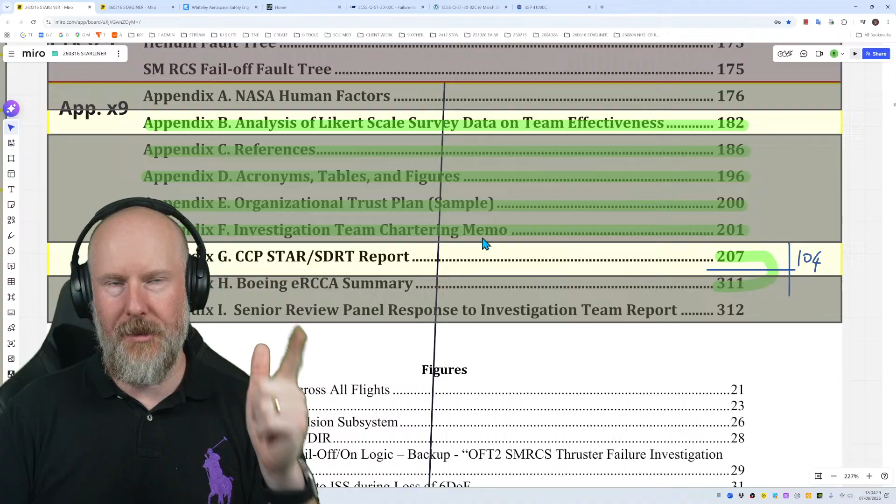So we got up to last time, we started working through yesterday. This week we've done two live streams, Livestream 27 and Livestream 28. We started to go through the commercial crew program STAR and SDRT report. This is like two investigation teams' work that's been put together in a report, which has formed an annex to this bigger PIT team investigation report. This is quite a large section, over 100 pages. We started digging into it in detail yesterday on Livestream 28, and hopefully in Livestream 29 today we will get through it, and then that'll be the end of the report. But as I say, it's quite a big section, so if I need to schedule some more live streams, then I'll just have to do that. There's the progress through that section of the report. We've got through the first part, and we've got to get through all of this. So we're going to make some good progress. We're going to pick up today with general findings.

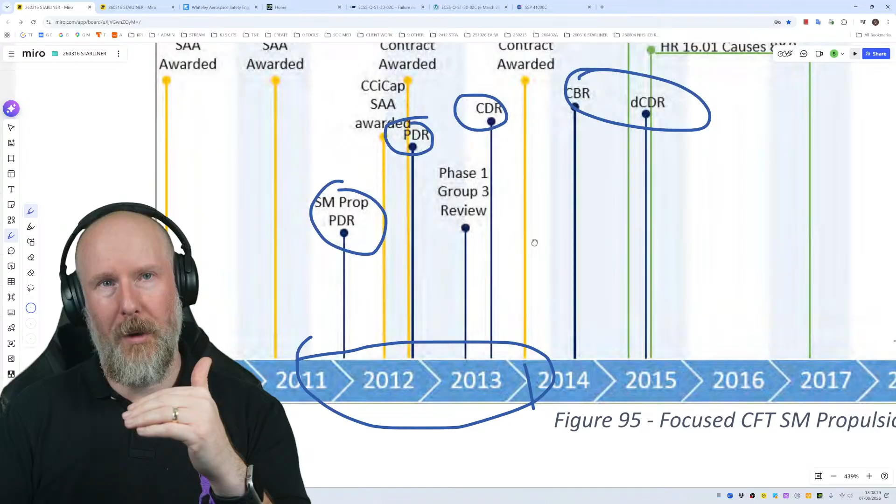So you could argue that if there are issues with the safety assessment and the design, the architecture of the propulsion system, it was kind of baked in that time period, 2011, 2012, 13. So it's a full 10 years before the thing went flying for the first time. Or was it the first time? Was it? Oh, there we go, 2021, 2019. So before they put people on it, it was 10 years.

But before they went flying the OFT 1 and 2, 2019 and 2021, they had issues with propulsion during that period. So yeah, there was opportunity to recognize the issues. So why was that opportunity lost or squandered? What was going on?

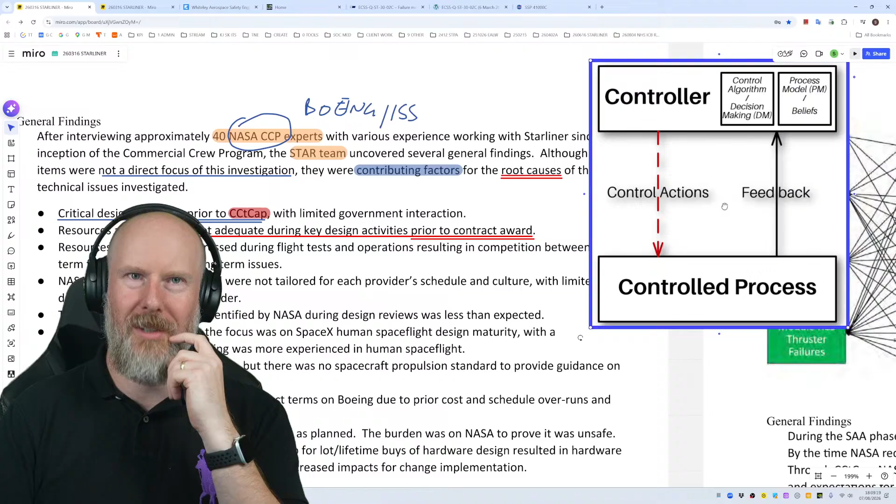Resources and skills were not adequate during key design activities prior to contract award. Okay, so thinking about the control loop, let's get our little jigsaw piece together. Where is it? There we go. Let's have our jigsaw piece down here. This is the core concept. So who or what is the controller in charge of resources and skills? Who's in charge of that? What organization is in charge of that? Why does it make sense that they didn't have adequate resources and skills? That was talked a bit about yesterday on yesterday's live stream. But again, this is what the investigation should be going and digging into.

Resources and skills were stressed during flight test and operations, resulting in competition between near-term flights and resolving long-term issues. So that balance between, the closest crocodile to the canoe. I'm sure you've heard that terminology, and it frustrates the hell out of me, because if you're on a canoe and there's some crocodiles coming and you're going to go over a waterfall, what do you deal with first? Do you deal with the crocodiles, or do you try and paddle away from the waterfall? Which is it? I'm not saying there's a correct answer. I'm just saying it's a stupid analogy that doesn't really help the complexity of this situation.

Because you must, by definition, have some part of the control structure dealing with the crocodiles and another part of the control structure dealing with the waterfall, or trying to anticipate waterfalls and trying to keep away from them and make sure you've got enough power and enough people paddling to get away and not fall into a dangerous situation. Fundamentally, that's what the control structure is there for. And if your control structure, your organization does not have that, that is a fundamental issue with leadership, and leadership providing adequate resources to be able to perform the mission. There's no getting away from that.

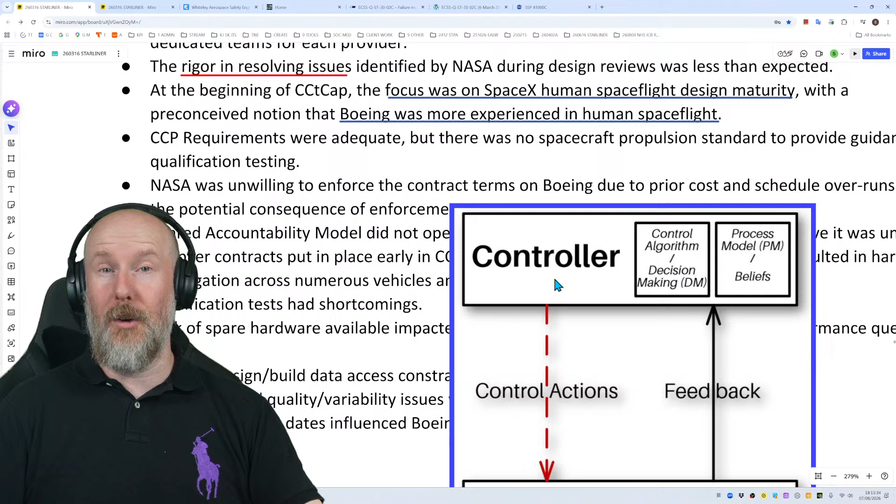And if you're lucky, they're already doing STPA. Go and talk to them. And if they're not doing STPA, then ask them why not. Get them doing it. Get involved. Give them the resources to do it. It pays in dividends disproportionately.

It's fantastic. Okay, right. So CCP requirements were adequate, but there was no spacecraft propulsion standard to provide guidance on qualification testing.

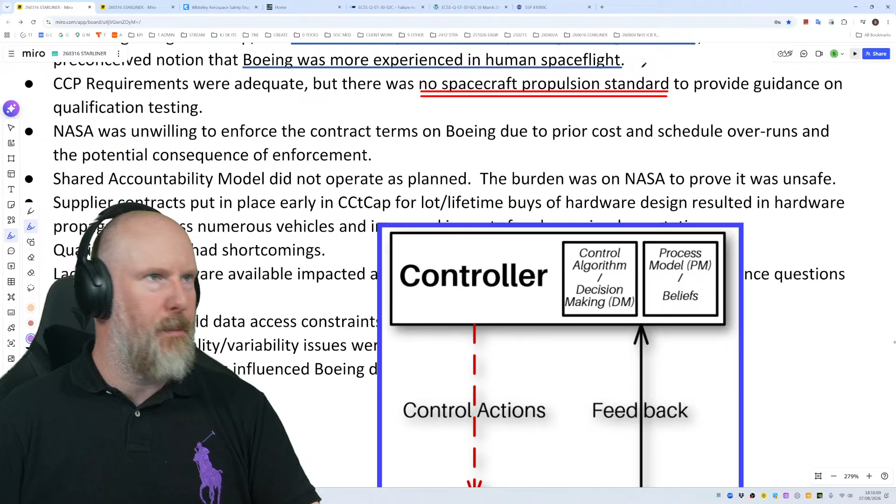Okay, so why was there not a propulsion standard? Why was there not one? If earlier in this part of the report it was saying NASA's done a lot of this stuff, so is there a spacecraft propulsion standard? It's just that it's not been provided, or what's the situation there?

I think that's an action. That's a recommendation to get to the bottom of that, because you're going to need one for the future, and if you haven't already got one, needs to be developed.

Okay. NASA was unwilling to enforce the contract terms on Boeing due to prior cost and schedule overruns and the potential consequence of enforcement.

That is very interesting. So if this is NASA and they are unwilling to enforce the contract terms on Boeing due to prior cost and schedule overruns and the potential consequence of enforcement, is the contract terms actually appropriate? Is the contract actually appropriate? Because the contract and the terms involved, and obviously I don't know, I've got no visibility of this, but based on some of my past painful experience, some of these contracts are basically dog shit.

They're not written very well. They're not actually, they're just contractual documents. They don't actually respect that the contract applies to a control structure, and that the content of that contract can undermine safety. It can cause the parties to behave in a way that's adversarial. It is perhaps arguably not collaborative. It's more competitive, more adversarial than it really needs to be.

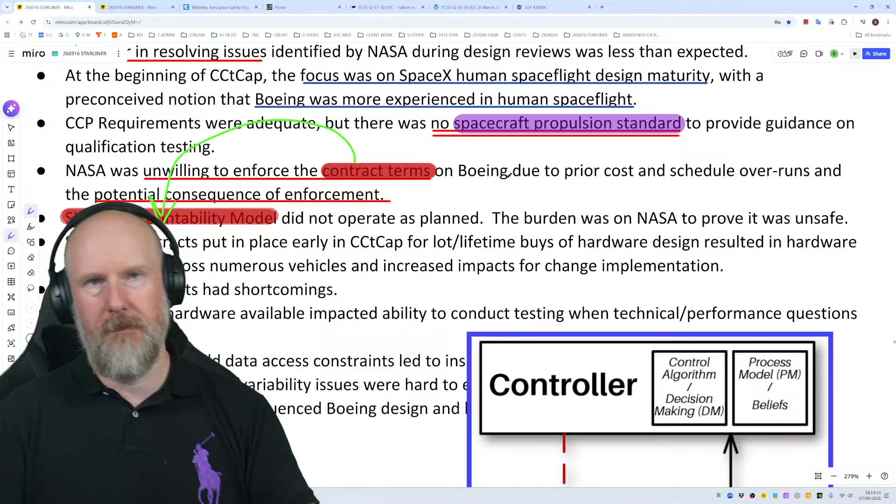Spot some fantastic opportunities. Anyway, shared accountability model. There we go, that's the thing I was banging on about yesterday. I expressed my displeasure about it. I think the contract terms and the shared accountability model, I think they will go a long way to explain a lot of the problems. I think if you have a look at those together, I think that would explain a lot of the issues we're seeing here with the way the program has been run.

This is not simple failures and thrust anomalies. This is programmatic leadership faults, programmatic structural issues.

Okay, so it did not go as planned, did not operate as planned. The burden was on NASA to prove it was unsafe. I mean, that's not how it's supposed to be. The contractor, the supplier, it is their duty, their responsibility to prove that their thing is safe. And any counter evidence to that, they should be open with it and get it out in the open. That's the principle of what a safety case is all about.

And there are both arguments for and against safety cases, which I'm not going to get into now. In principle, I like the idea of safety cases. In practice, that's a whole different conversation, which we can maybe have in a separate forum.

Okay, supplier contracts. There we go. Supplier contracts put in place early for lifetime buys of hardware design resulted in hardware propagation across numerous vehicles and increased impacts for change implementation. Yes, absolutely. Again, who decided it was a good idea to do the lifetime buys? Why did it make sense to do that? What constraints do we need putting in place in the future? How do we design this to be better? Because so many big complex programs stumble and fall with this exact problem, and it fundamentally screws up safety if we don't manage this really carefully.

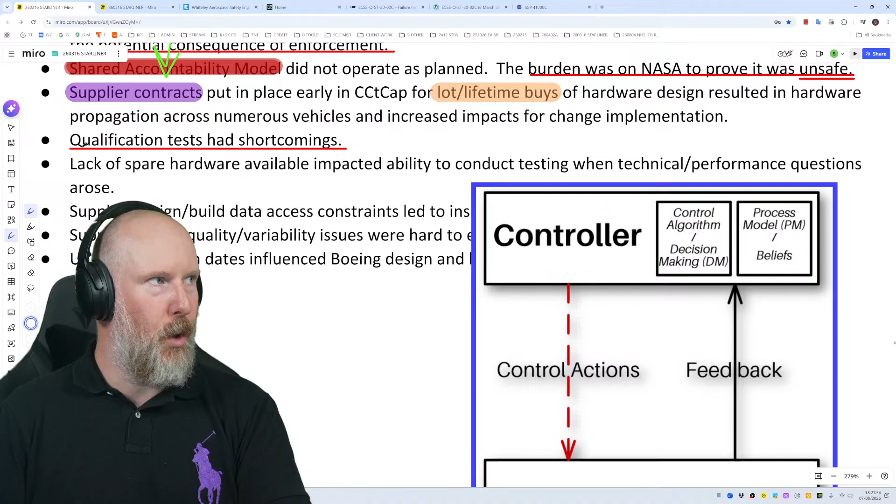There we go, so qualification tests had shortcomings. Well, okay, pardon me. Who is in charge of the qualification test? Who is the controller for that? Why would it make sense for them to allow those shortcomings to happen? Did they even know there were shortcomings? Or did they accept the shortcomings with some genuine reasons? If so, why was that? What do we need to prevent that or deal with that in the future?

Lack of spare hardware available impacted ability to conduct testing when technical performance questions arose.

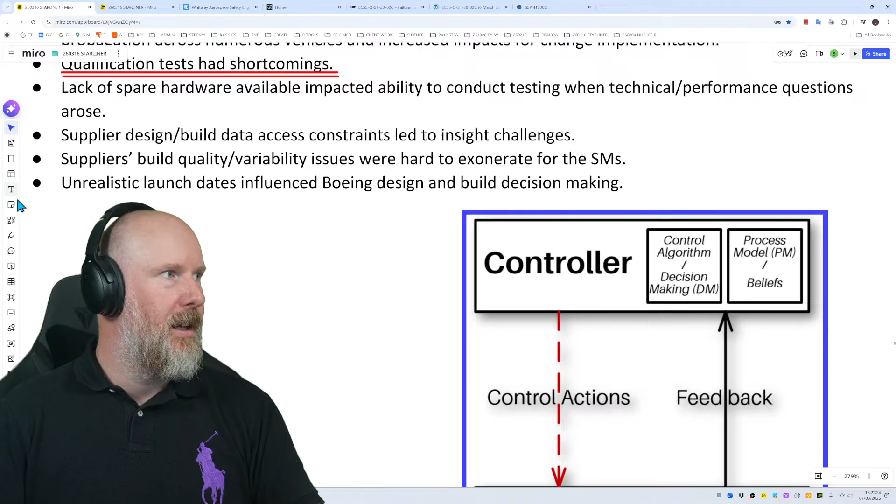Again, who or what is involved in the spares aspect of it? What were the issues going on there? Why would it make sense for this to be allowed to continue like that? Was this fed back to the senior levels in the program through their huge master schedule that basically says, hey, we haven't met this particular set of important safety and design engineering criteria. We need to do something with the program dates or the program delivery, the program dependencies. Were those conversations going on?

We said yesterday about the structure of the board structure, the commercial crew program board structure, and we have these various boards. Which of these boards were dealing with those issues for qualification and testing? Were those issues being escalated? How were they actually being addressed? What's the management system behind this organization chart? That's the purpose of building a control structure model, to make those things explicit so we can explore and examine them carefully.

Yeah, there we go. Supplier design build to data. Supplier design build data access constraints led to insight challenges. Again, this is safety information system level issues. Why was that an issue? What was being done to sort that out? Is it just one of those, it's just a contracts issue, or it's an IT issue, it's an admin issue? No, this is a critical safety issue that should be given the attention it needs.

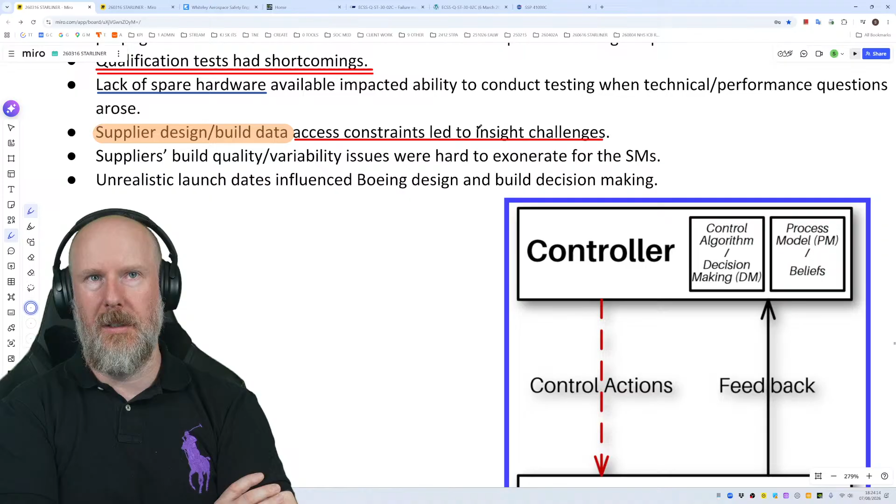And again, I wonder if that was on the agenda, the list of issues and actions, forward actions for those boards. And if it wasn't, why wasn't it on there? The same for recruitment and retention and resourcing and skill levels. That should be on the agenda for those safety boards, and they should be escalating, getting that sorted out. Is that what they were doing? Is that what the boards were doing, or were they not doing that? If not, why not? If they were, great. Let's have a look at why that wasn't adequate.

Suppliers build quality variability issues were hard to exonerate for the service modules. So again, who or what is in that control loop looking at the supplier and the build quality variability issues and the acceptance of that? And then where did that information, hey, there's an issue with quality and build quality and variability, where is that fed to in the senior levels of the structure? How was that actually addressed?

It sounds like there's so many feedback issues and controller issues across the senior levels of this particular program and its interactions with its contractors and suppliers. And this part of the report, it highlights some of the issues, but where is the discussion? Where is the investigation of these issues? Maybe it's in the rest of the report. Let's not jump too far ahead.

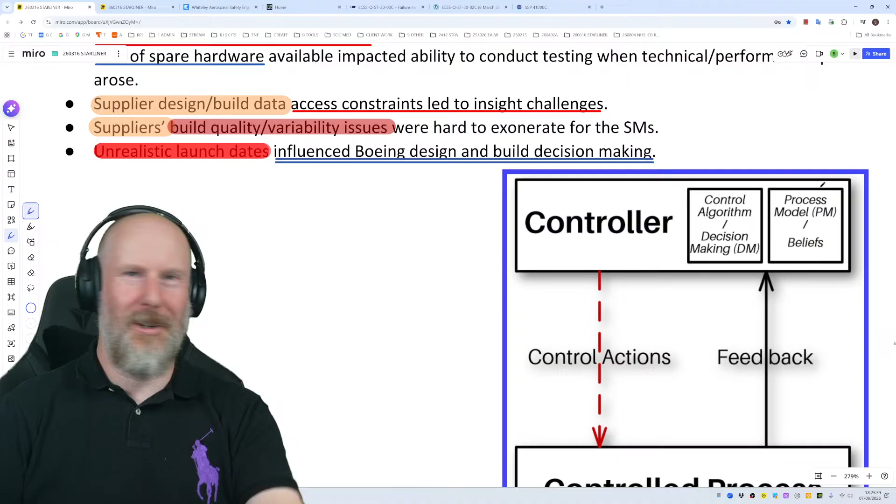Unrealistic launch dates. Yeah, look at that, everybody. Everybody loves unrealistic dates, magical dates. Everybody loves that, don't they? Influence Boeing design and build decision. We shouldn't be surprised if we've got ridiculous dates and they're influencing design and build decision making. Then we've got a serious problem here. We've got a serious leadership problem.

Don't get me wrong, I understand in certain circumstances the date is the date. Totally get that. But whenever the evidence starts to bubble up that the date is ridiculous based on the amount of engineering and all the other stuff that needs to happen, we shouldn't then just keep pushing on and ploughing on to that date. Because if everybody in the program knows that they're ridiculous magical dates, then you're forcing your staff to start pretending and start lying to themselves about the reality of the situation. And engineers, especially engineers like myself, we'd just rather have the issues out in the open on the table so we can deal with them.

Talking about pretend dates and focusing on dates instead of the engineering is precisely how you march your team off the cliff. So whenever there's evidence of that kind of nonsense going on, I would argue, and this is my impression, that some of these safety boards should be calling senior leadership and the program management to account and saying, look, we can't be having ridiculous dates forced on everybody. We have to have a sense of reality of the situation. And maybe what I'm saying is a little bit naive.

I can understand the politics and stuff going on. I can appreciate the politics going on. But we have to also reflect and respect that nonsense dates that are made up, or issues with dates that keep slipping, it leads people not to want to talk to each other. It leads to increased stress in the program, stress in the people. It increases burnout and all of that good stuff, and it undermines people's trust.

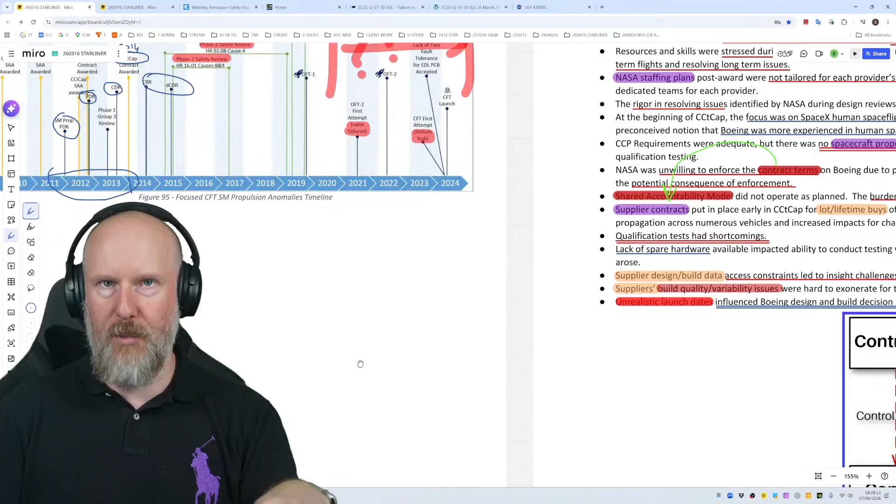And when you're working in a complex program such as this, especially with such significant potential consequences, if you've got this kind of culture, these kind of lies going on, we can't be surprised when we start having bad things happen. So we have to be open. We have to develop trust amongst ourselves. And if anything starts to undermine or cause problems for that trust, it needs to be talked about out in the open.

I'm assuming that's what's been going on. I'm getting a feel for that's what's going on based on my safety spidey sense. There we go, I should trademark that.

I don't think this is a complete list, I'll be honest. All of these hint at issues in the control structure in a few hot spots, mainly in how the program is led, the leadership, the way activities, tasks, deliverables, issues and actions are managed, and how information is flowed amongst people. And then, of course, trust. It sounds like loss of trust is endemic all over the place, and apart from making the day job a lot more difficult, it burns people out. It makes them not want to come to work anymore. So how are we going to expect them to perform to a high level and be disciplined and get stuff done under all of those conditions? It's just not fair or realistic.

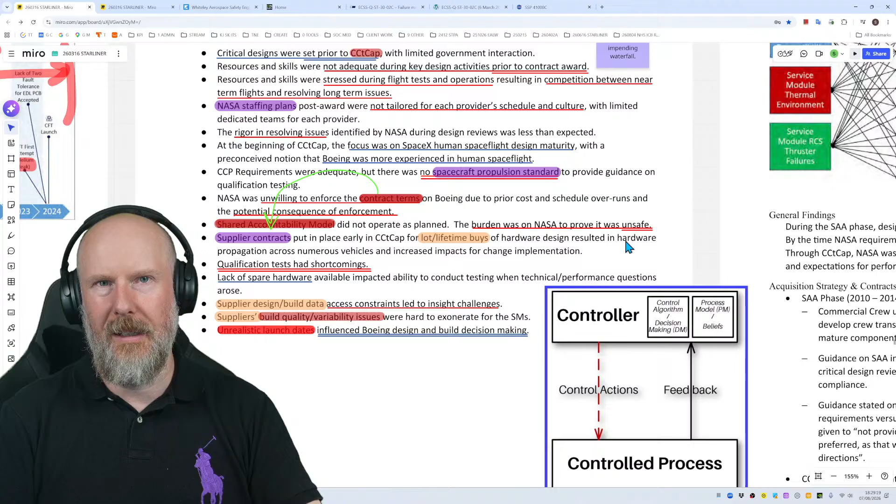Anyway, let's keep moving. Right, what's all this then? So this is Figure 96, General Findings Matrix. Let's have a look - 1, 2, 3, 4, 5, 6, 7, 8, 9, 10, 11, 12, 13, 14, 15. Wouldn't it be nice if it was a numbered list? I think this is all of them, isn't it? 3, 6, 9, 12, 15. So that list there on the left, this list here is this list here. And handily, it's been split into 4 groups.

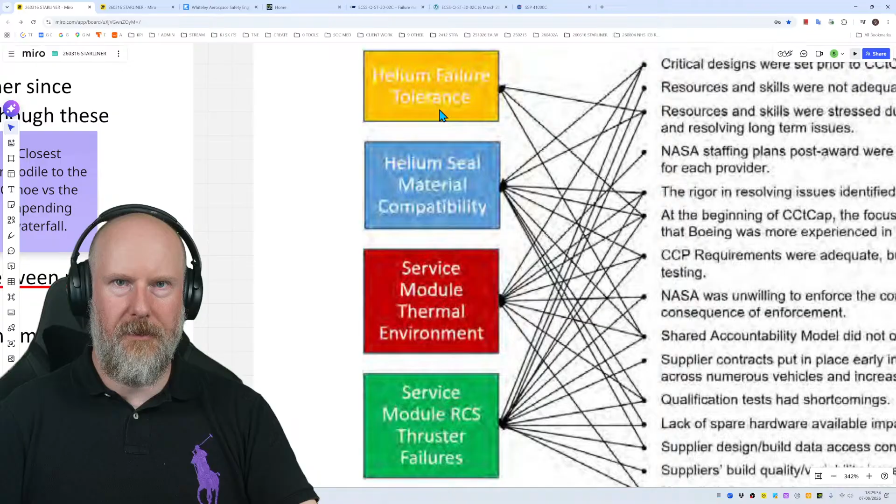Now, this one, I think, is helium - I probably should stick some text in there, shouldn't I? Let's do that. Where's my text box? There it is, let's have one of those. Stick it over there. So this is helium failure tolerance.

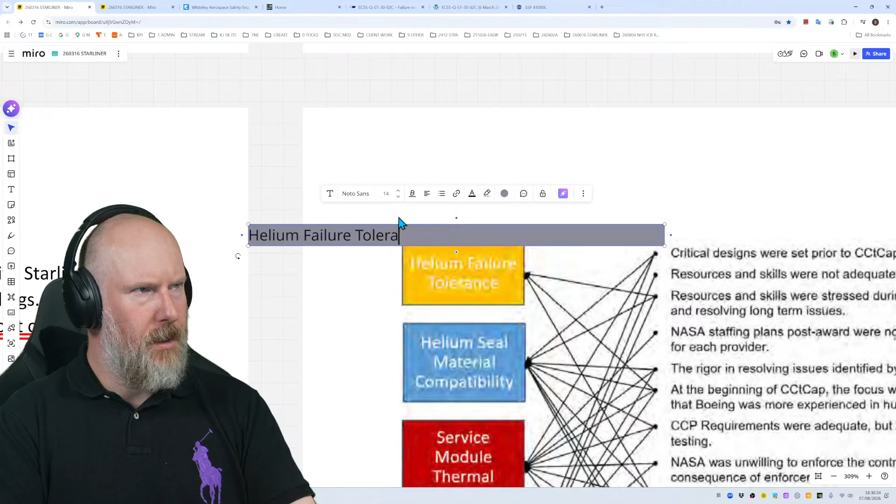This next one down is helium seal material compatibility. Learn how to spell on my live stream.

Service module thermal environment. I tell you, the thermal environment in my office is ridiculous.

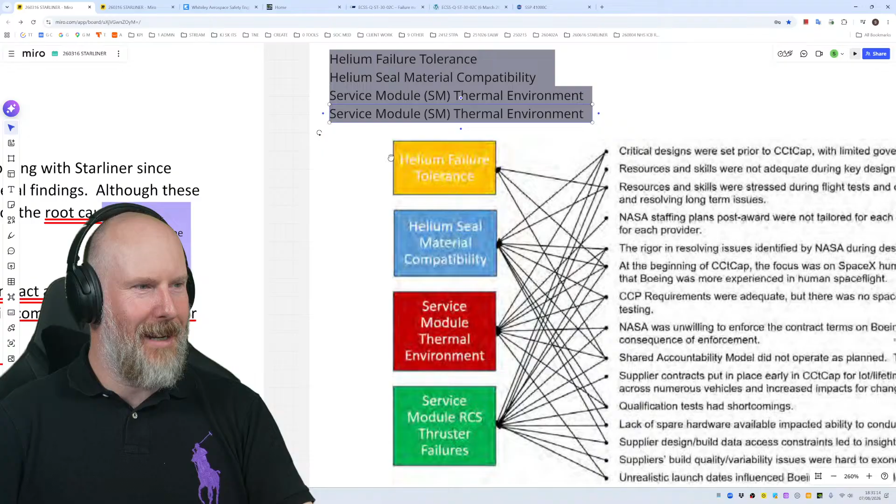It is so hot, I'm not used to it. All the grass around the local area looks like it's dying, it's so yellow and pale. Yeah, it's not good. I do wonder if El Nino is having any impact on our weather. And depending on which YouTube channels and people you follow on Twitter, they're also talking about the potential for a pole flip, so that should be exciting. I don't know how true that is, but it's...

Anyway, right, so we've got helium failure tolerance, helium seal material compatibility, service module thruster failures, RCS thruster failures, service module thermal environment. There we go.

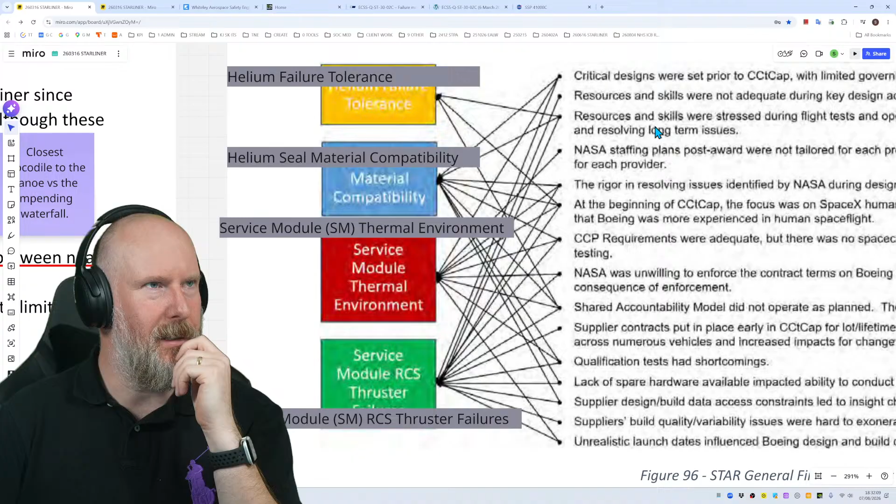Yeah, again, this is not the easiest way to present information. So that one relates to 3 particular issues. So does resources affect everything? 1, 2, 3. So resources doesn't affect that one - that's interesting. Resources not adequate affects that one. NASA staffing plans affects that one.

Next time, what I'd recommend is put a table, list these number 1 to 15, call these topics A, B, C, D, and just put A, B, C, D in each box - 4 columns - and put it in that way, so it's nice and quick for the reader. But I know these guys and girls also worked very fast to produce these reports, so this might be quick for the author, but very slow for the reader, the audience.

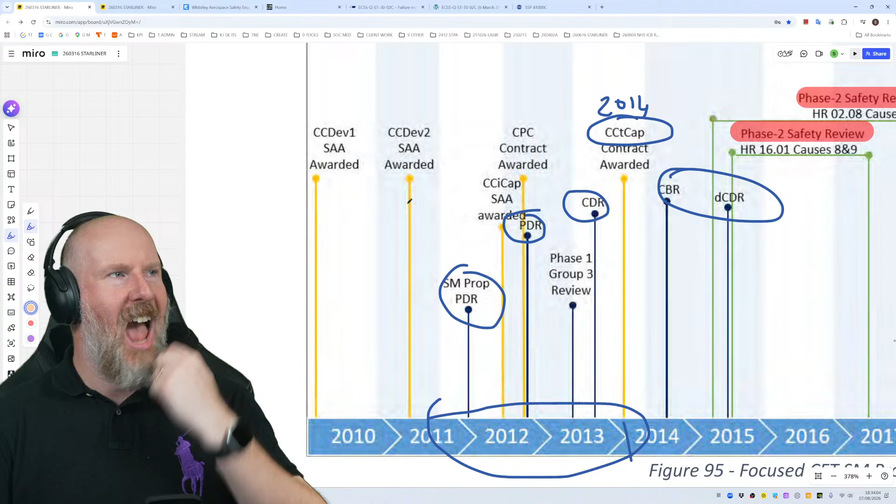There we go, right, okay. So this is the next section, this is also about general findings. During the SAA phase - let's just zoom out and have a look where that is on that nice little diagram we had earlier on. Where is it? There we go, look, SAA phase - so this one, and this one. So that time period, SAA phase, should I say.

Design decisions and implementation were proceeding with a light engineering touch. What does that mean, everybody? Does that mean it's a light touch, but we've got the right people doing it? Or it's a light touch because we haven't got enough of the right people? Which is it? By the time NASA requirements were understood, the timeline was not realistic for implementing new designs.

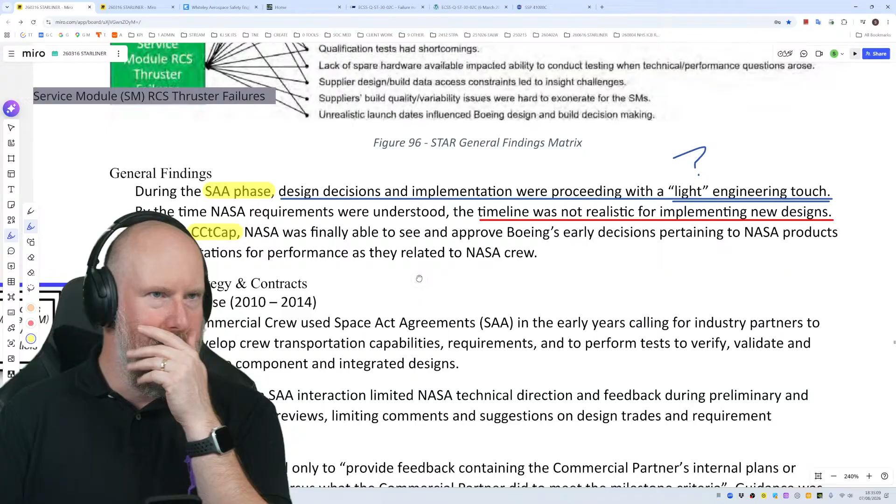Through CCtCap, NASA - actually, I need to make these different colours, don't I? Because they are time windows, Simon. And I like to use yellow because it's easy to see and stand out. There we go, CC. There we go, right. Pardon me.

Through CCtCap, NASA was finally able to see and approve Boeing's early decisions pertaining to NASA products and expectations for performance as they related to NASA crew.

Right. Acquisition strategy and contracts. SAA phase 2010 to 2014. So let's just duplicate that, and then I don't have to keep jumping around on the screen. Come on, Miro. There we go. Right, let's just go over here to the graph. See, there we go. Look. So let's just put that to one side there. Put that to one side there.

Right. So the SAA phase, 2010 to 2014, commercial crew used Space Act agreements in the early years. I'm using purple to highlight documentation as distinct things that we could potentially reference if we needed to. In the early years, calling for industry partners to develop crew transportation capabilities, requirements, and to perform tests to verify, validate, and mature component and integrated designs.

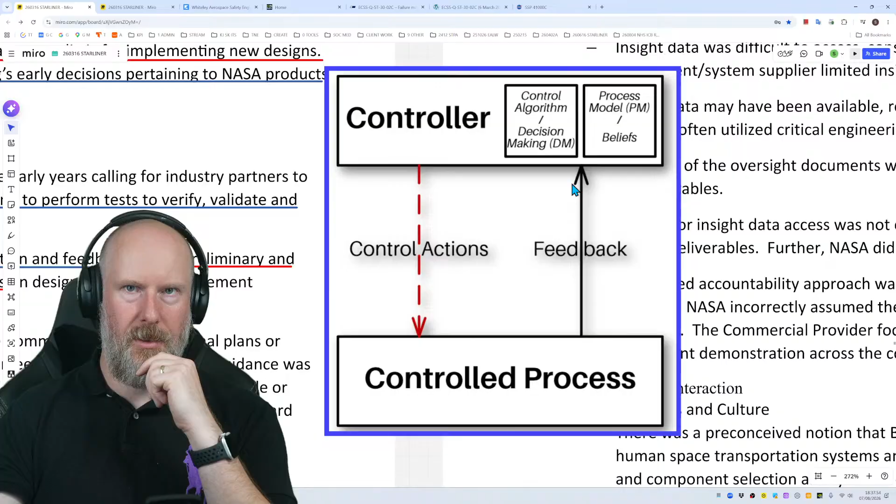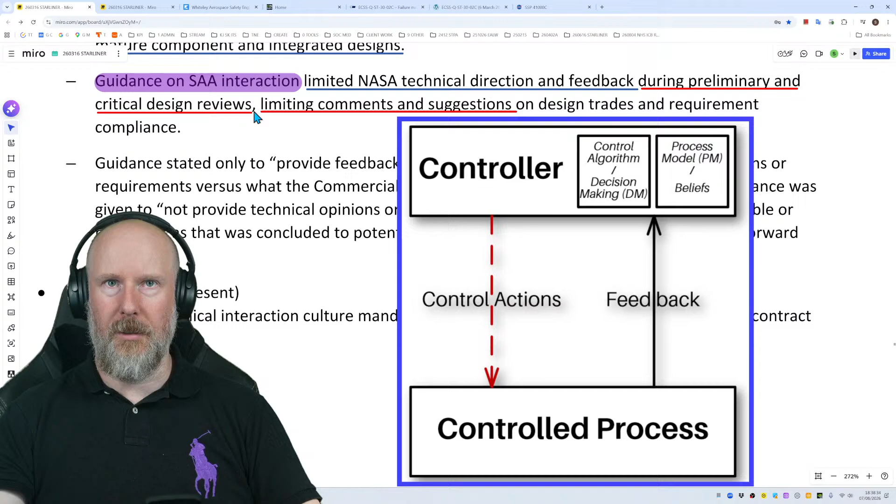Okay, before we continue, let's just have a think for a minute about that. So the organisation Commercial Crew used Space Act agreements in the early years. This is the Commercial Crew controller. They provided Space Act agreements in the early years of the program, and also associated guidance. So these two were essentially provided as control actions to the program, to the suppliers, to the industry partners. Commercial Crew as an entity, as a stakeholder, as a controller, provided Space Act agreements to the industry partners, and they also provided guidance. And that guidance constrained the industry partners and NASA in terms of the technical direction and feedback during the early and most critical parts of the system lifecycle, and limited comments and suggestions.

So for me, if you were going to bang on about root causes, I'd argue this is one of the thickest root causes you could find. If those agreements and guidance are basically stopping NASA from doing its important role during the most critical part of the life cycle, we can't really be surprised we've got these problems. That means wherever this guidance and limitation is applied to other subsystems on the spacecraft relating to safety and mission success, I wouldn't be surprised if they are also similarly hobbled, undermined as well. So a recommendation I'd make is to go and do a technical audit of all those other safety critical, mission critical subsystems to find out how they've also been hobbled by this.

It's just that the propulsion system is used a lot and is so important to the mission that these issues have become apparent. Whereas how many other systems, how many other capabilities are also undermined by this kind of restrictive behavior? In theory it sounds like a great idea from a program management perspective, but when you look at it through the lens of a control structure and how that affects safety, it seems quite obvious this kind of stuff is dangerous and needs to be dealt with. It needs to be addressed, with recommendations to unpick that and certainly not have that kind of nonsense on future programs.

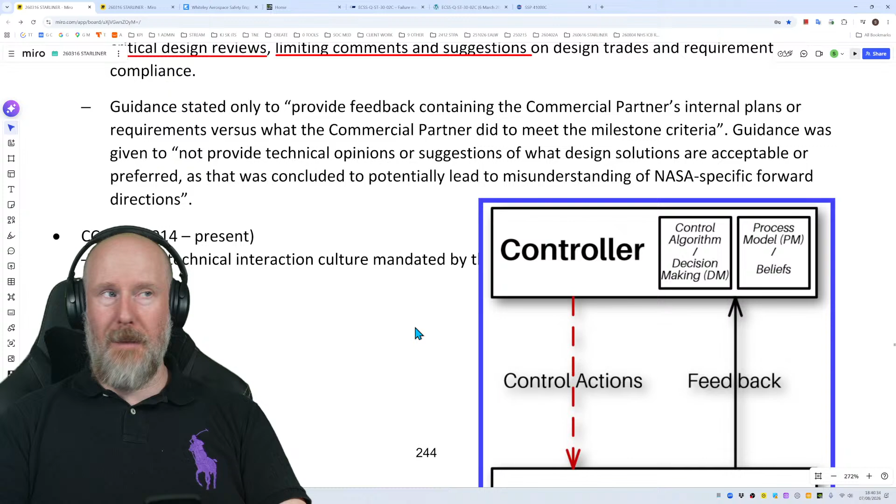The control structure needs a fundamental change to address that, and it needs a fundamental activity to recover from it - that's if it can be recovered, because it may be that there are loads of fundamental safety issues baked into these systems that can't be undone without spending a fortune. It might even be cheaper to start from scratch, as ridiculous as that might sound.

This section here is absolutely fantastic. This is fundamental to this case study, this accident. And this is the thing - if you use STPA, you can apply it in the earliest possible stages of your program, in the concept stage. You can identify safety requirements, safety constraints, architectural requirements and constraints very, very quickly, even before you've decided on what technology, what actuators and sensors you're going to use. That's one of the beauties of it.

Now, of course, you can't do that with fault trees and FMEAs and all of that, because you typically need to have done a functional hazard assessment. You need to know what components you're going to use and what type of failure rate data you're going to use, very broadly. But if you use STPA, you can use it so much earlier, and perhaps even supercharge your fault trees and FMEAs, focus your FMEAs a bit more.

Now, imagine if this program had used STPA back in 2010 to 2014. We wouldn't be here today. I'm almost certain we wouldn't be here today with this issue having happened. They would have caught it early and dealt with it. But again, I say that with the benefit of hindsight. I also have to reflect that the issues about organizations, resources, skills, staffing, and the change in contract terms and the shared accountability model, even if you could do STPA in that circumstance, you would really struggle. The shared accountability model as it's described, the contract terms as it's hinted at, and these issues here, they're fundamental flaws baked in from the very beginning of the program.

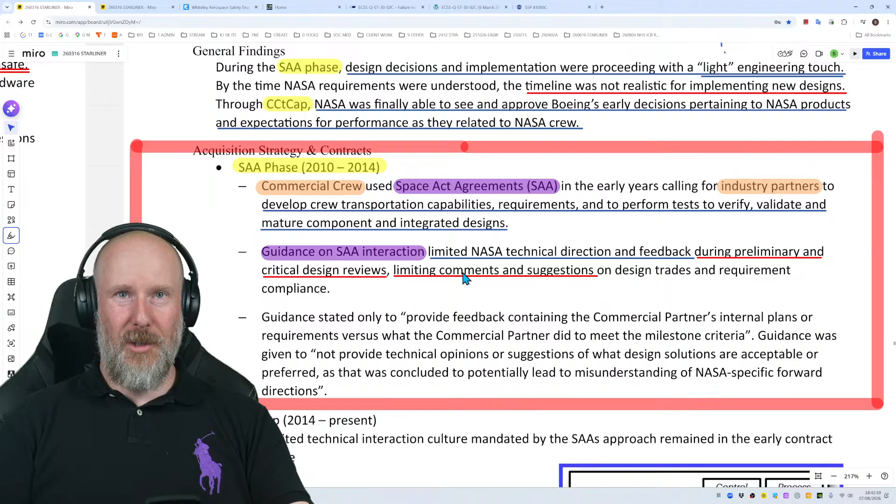And these issues will exist in other programs, I'm pretty sure. If you work in big programs that have this similar sort of stuff going on, the clock is ticking. Something's going to happen that's expensive.

Okay, right, CCtCap. So this is not that one, it's this one. So that's this point going forward here, look. So there's CCtCap.

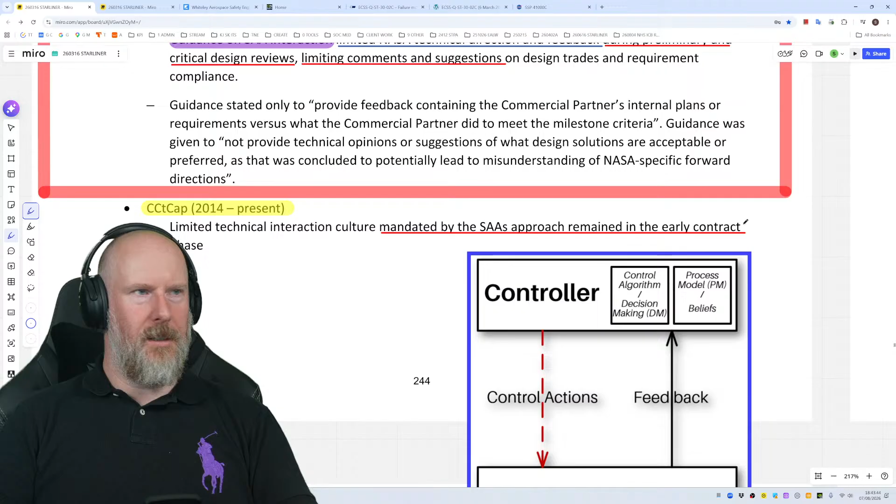2014 to present. So limited technical interaction culture, mandated by the SAA's approach, remained in the early contract phase. So the limited interaction culture, there we go.

This was going to happen. This is going to happen. There's no getting away with it. When this kind of nonsense starts happening, it's inevitable. There's no probability about it, is what I'm saying. If that's how the organisations are behaving, that's how they are required to behave because they are overly constrained inappropriately, then you get systematic leadership issues, contractual issues, structural issues.

Anyway, right, at the start of CCtCap, why don't they just call it phase 1, 2, 3, or phase Alpha Bravo Charlie, or phase Red Orange Yellow, or whatever.

At the start of CCtCap, Boeing's main focus was to finalize the designs, to award supplier contracts. Again, there we go. So the control action to award supplier contracts, and how all the contracts are done, how money is transferred in terms of payments and all that kind of stuff. All of those constraints fundamentally disrupt the engineering process, and particularly the safety engineering process.

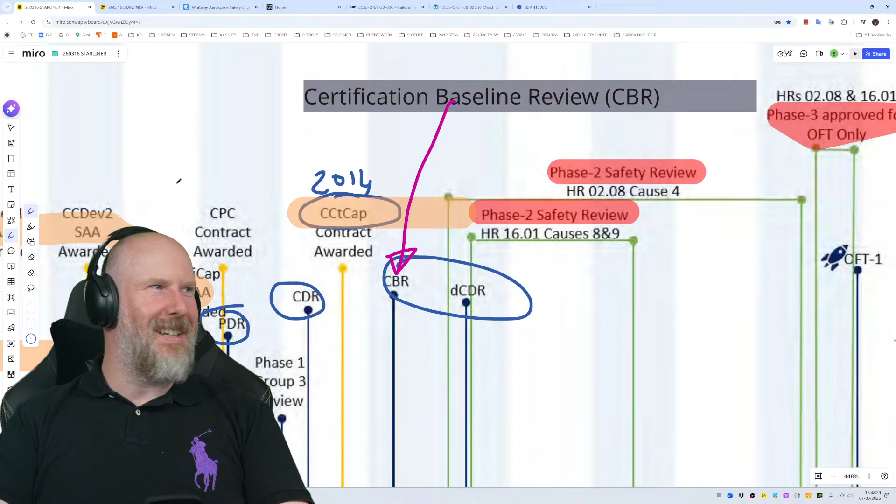I'm too old for this. Anyway. It was green last time, wasn't it?

There we go. Right. So the CBR, the Certification Baseline Review, the first milestone on the contract. Yay!

Focused on processes and management plans. Everybody loves management plans. To allow funding release. There we go. What was I saying a few minutes ago? Mitigating impacts of contract delays due to Sierra Nevada protest. Oh, right, okay.

Interesting. So there's a bit of, what's the word, hanky panky going on, for want of a better description.

The CBR did not meet the expected intention to level set the commercial provider's technical baseline for the DDT&E contract at contract start. Sorry, DDT&E, that's design, development, test, and evaluation at contract start. Okay.

So the Delta - oh there he. See, I guessed, I knew it was going to be. The Delta certification design review. Oh, it's a certification design review, not a critical design review.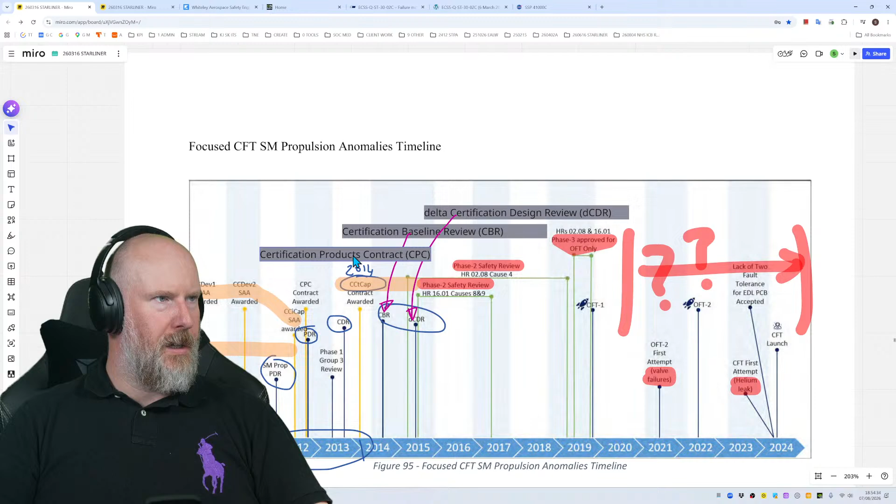There we go. Certification, products, contract. Right. So that means that over here, CPC. Where's CPC, everybody? There it is. Look at that, there it is. CPC. Let's get a pen. Oh, sugar.

So the Delta Certification Design Review held after contract award was a missed opportunity to resolve known design issues identified in the SAAs and CPC.

Okay, so when they say known design issues, is it that all of the stakeholders knew there were design issues, and it's not clear how they dealt with them or didn't deal with them? That's the point in the investigation, it should find that out. Or is it that certain senior stakeholders didn't know there were issues, so they didn't get the necessary attention and priority they needed? Which is it? That's what this investigation, or a follow-on investigation, should look for.

Yeah, okay, right. Schedules. Unrealistic schedules. Actually, let's just talk about that topic for a minute. Unrealistic schedules, right.

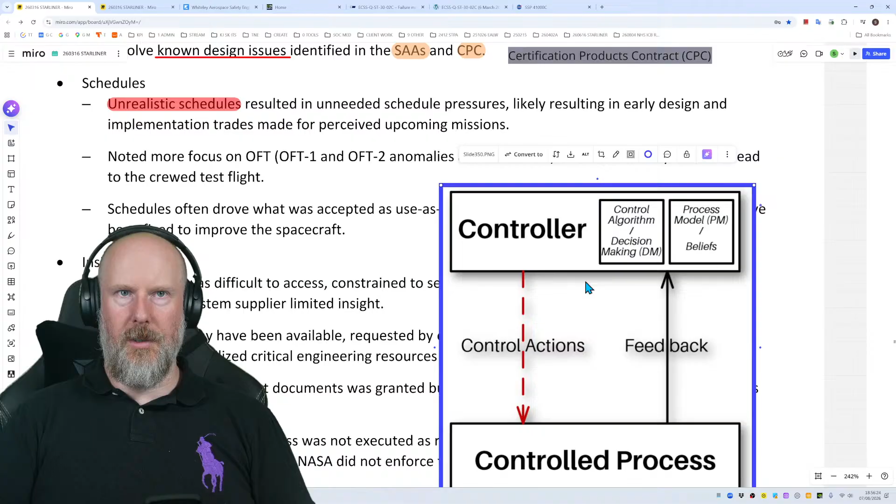Who or what are involved in defining the schedule? Who are the stakeholders involved in doing that activity? And why would it make sense for them to provide unrealistic schedules? Is it because the people they are requesting information from do not have the time, resources, or skills to create a schedule of the work with estimates of time? Or is it that they have people who have done exactly that, given a realistic schedule with some 3-point estimation, best case, worst case, most likely case, and provided it to senior leadership doing the planning and scheduling, who have just ignored it? Or it's provided in a tool so complex no one knows how to use it, or in a spreadsheet that keeps breaking every time someone tries to update it. It doesn't really matter which of those it is.

The question is, what is going on with the scheduling? Who is the controller in charge of the schedule? What decisions are they making? What beliefs, what mental models do they have? What feedback do they have? Who or what is the controller above them? What procedures and process are they following? What are the tools and formats they should be working to? What is going on there?

And do they understand how damaging an unrealistic schedule is? And when I say unrealistic, I mean fantastical or magical ones that are so ridiculous everyone knows they're ridiculous, but everyone continues to just lie or ignore them. That has a real impact on culture and the way people behave.

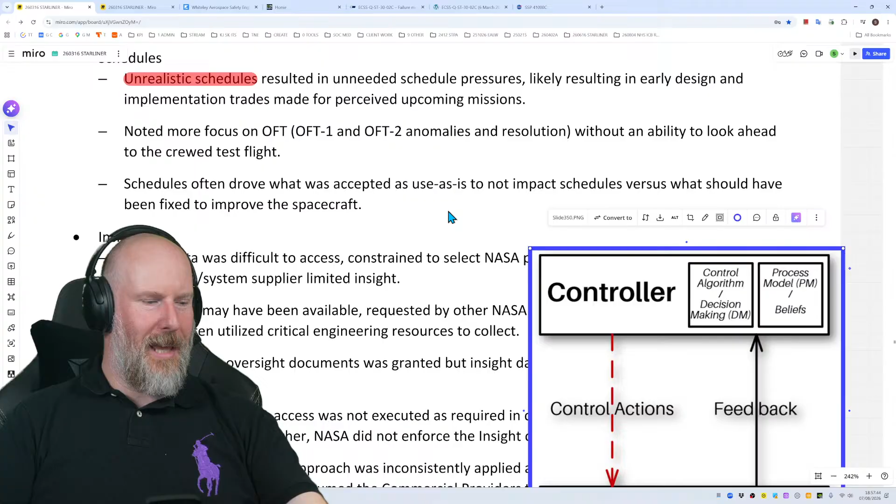Anyway, let's keep going. Resulted in unneeded schedule pressure. Yes, absolutely, unneeded schedule pressure.

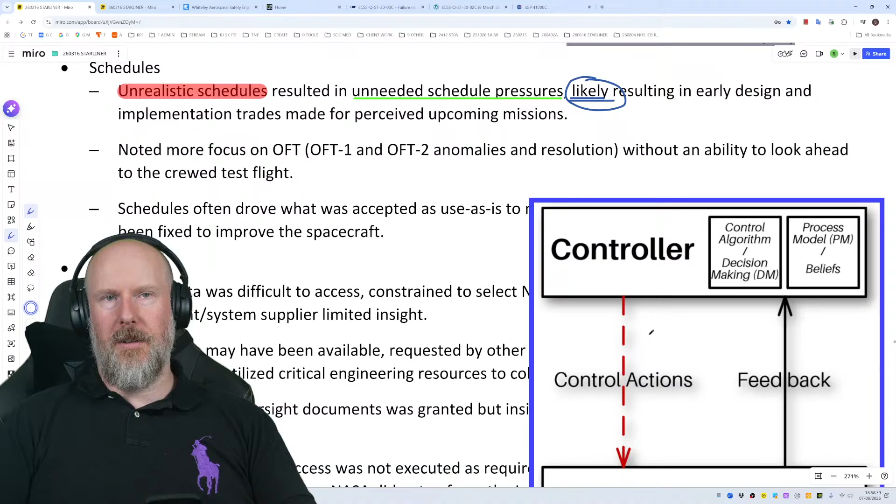Yeah, there we go. Likely resulting in early design and implementation trades made for perceived upcoming missions. I think that's entirely reasonable to say. I think we could probably turn that into a certainty if you ask people. If the engineering teams have basically been given dates, they've said, well, we're going to have to make this engineering trade-off, which we don't really want to do, but you're forcing us to do because of program reasons. Then those design reviews, those meetings that discussed and agreed it, there should be minutes of those meetings, and you should be able to go back and find out how things were led, how things went.

Okay, so noted: more focus on OFT 1 and 2 anomalies and resolution, without an ability to look ahead to the crewed flight test. Yeah, that's interesting. More focus on OFT without an ability to look ahead to the crewed flight test. That's quite interesting.

So is it that the teams, the engineers, have been focused on creating a crewed flight test qualifiable and capable spacecraft in the OFT timescales, instead of having enough time to do better engineering for the crewed flight test? Yeah, I mean, that's interesting in its own right.

So you could say that the schedules, whilst they're not controllers, provide a control action to the teams, to team leadership, influencing their decision making? Yes, it is. Is it a true control action? Well, it depends, doesn't it? If the program manager says that's the date, crack on, then I suppose that is a control action. But if it's here's the date, do with it what you will, they're going to impose the pressure themselves and try and kill themselves achieving that.

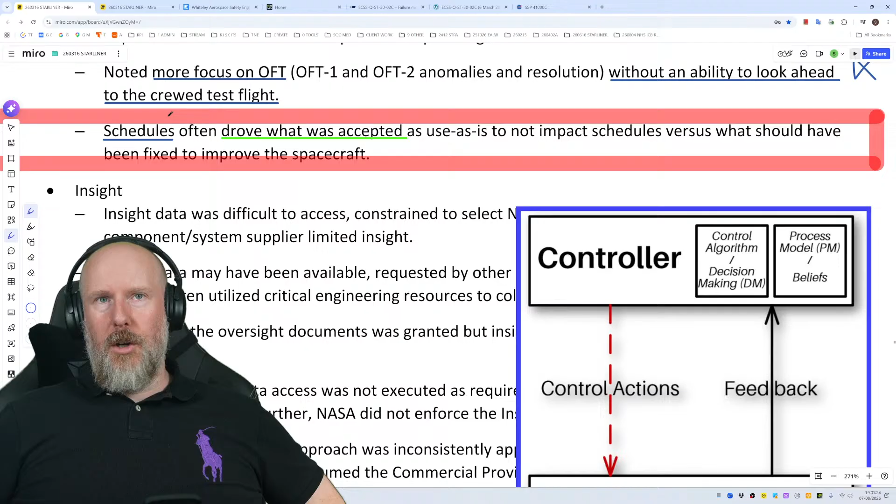So I think a recommendation is to go looking for other problems that have originated from this point and see what actions are needed to recover them or replace them, if you understand where I'm coming from.

Okay, insight. Insight data was difficult to access, constrained to select NASA personnel, and further constrained by component system supplier limited insight. Insight data may have been available, requested by other NASA personnel or Boeing, but took time.

So this is about management of data, data management, data control, what do they call it? Knowledge management as a discipline.

Chucking everything in a folder on a network drive that always seems to be getting full, and they never bother to actually make the space bigger for everyone to be able to do their work. Or the information isn't catalogued and controlled in a way that everyone knows what there is, like a master data record, master data list.

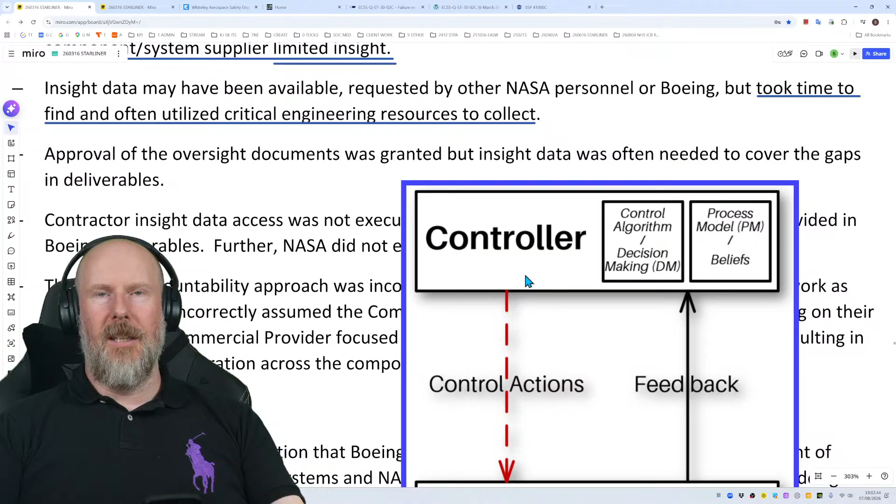The referencing is poor, the links are poor, you can't always read it, the quality of the documents are bad. They're like PDFs with graphs in it that you can't read, such as this report.

Version control, not knowing what's the latest version, which is the formally released version. I mean, one of my bugbears is people throw PDF reports around via email, and you can't be certain whether it's actually a formally sanctioned release document, even if it's got a signature page.

Or you don't know how many pages there are in the document. You don't know if there are pages missing. One of my previous past lives as an engineer was as a technical author for safety critical information, so I know how important it is to make sure information is properly controlled and written in simplified English so everyone understands it and it's unambiguous.

Anyway, where we go. So contractor insight data access was not executed as required in the contract. Ooh. Or in the insight plan provided in Boeing deliverables. Further, NASA did not enforce the insight clause.

Okay, so why would it make sense not to do that? What are the implications of it? That is certainly something that should be explored.

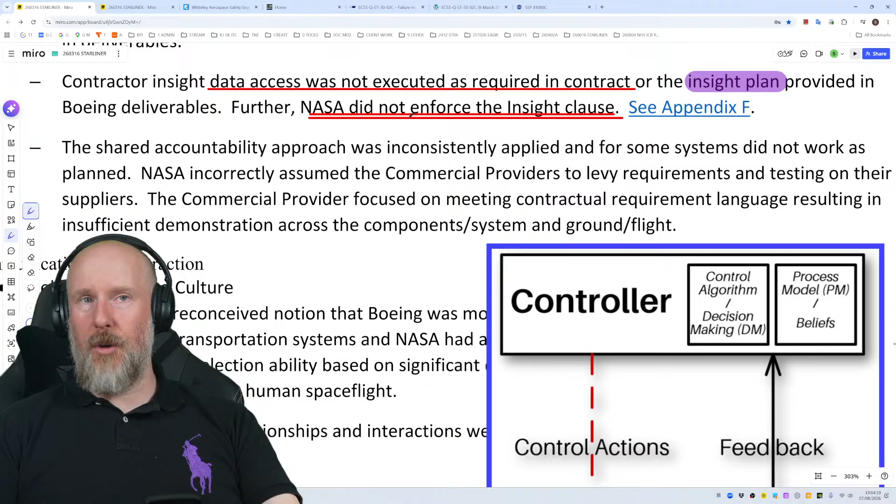And of course, this will happen on many programs. It's probably happening on most of their programs today. It's probably happening on your programs. Go and find out. Go and ask the safety engineers.

Hey, safety engineer bros and gals, how's it going? Tell me about your access to supply data. How's it going? Are you getting good support? Is it easy to access? Do you know what the latest version is? Are you being told when it's been updated? Are you being told that your comments have been addressed? Are there any open actions that need to be addressed?

And again, recognize that there's a huge admin burden associated with information management. And like it says here, it should not often utilize critical engineering resources to collect.

You should have an information manager that is friends with everybody in the program, and everyone in the program should know who that person is and be able to go and talk to them on a first name basis, so that they know where all the information is and that any information issues can be addressed.

Likewise, there should be somebody who is an administrator of review comments and actions. It shouldn't just be left up to the engineers to do all of that administrative burden. They haven't got the headspace to deal with administration. They've got to get on with the engineering.

So why would we be paying engineers to do administrative activity? And I'm not saying administrative activity and the people that do that work is not valuable. It is really valuable, it's critically important. But it needs to be allocated to the right controllers in the control structure. And allocating it to safety engineers, whether explicitly or not, or the engineering community, is not a good use of their valuable time.

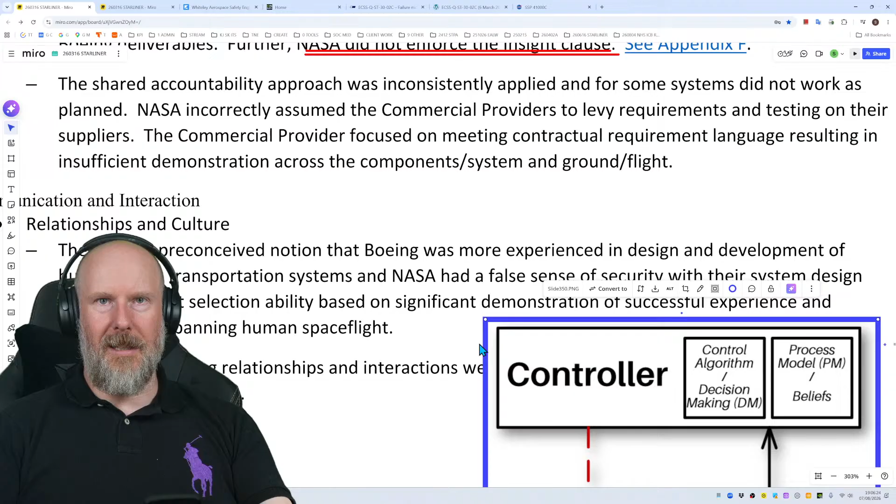So get some administrators to do it, some fantastic admins that everyone knows and loves and can support. They are key to this activity, key to the organisation, should I say, the program's success.

Right, okay, I've banged on about that. The shared accountability approach, oh yeah, there we go, that's this magical new approach, was inconsistently applied. And for subsystems, some systems did not work as planned. I don't think the plan was good to start with. I don't think that concept is actually appropriate.

I think that needs a proper going over with STPA. I'm certain it would show that it's nonsense. No offense to the creators, but how it's been described and what I've seen so far contributed to these issues, I think.

NASA incorrectly assumed the commercial providers to levy requirements.

NASA incorrectly assumed the commercial providers would levy requirements and testing on their suppliers. The commercial provider focused on meeting contractual requirement language, resulting in insufficient demonstration across the component, system, and ground flight. So why would it make sense for the commercial provider to focus on contractual requirement language?

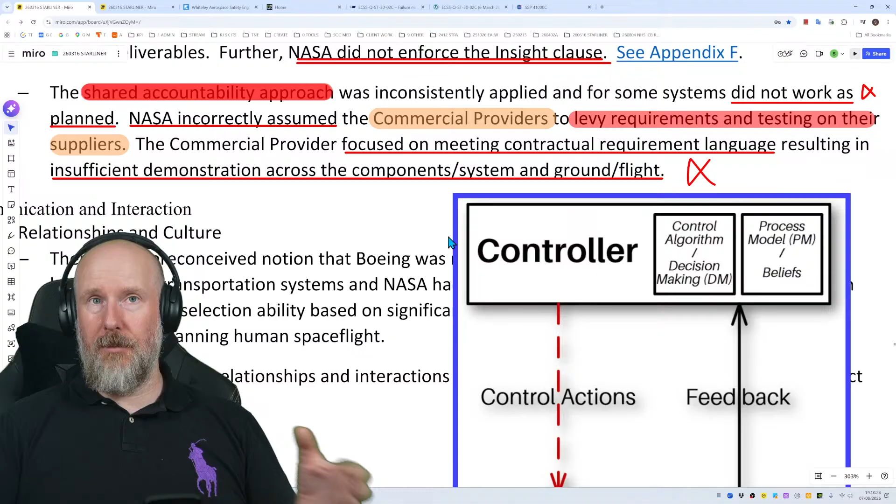So again, insufficient demonstration across component, system, and ground flight. I'm not surprised, I've seen that many times on programs and it's quite ridiculous. But again, it's a leadership issue, driven by inadequate contracts or inadequate behavior of program staff and project managers trying to do what the client wants under the contract, whilst not having the resources and support to do everything else they really need to. They're trying to do the best they can given the circumstances.

Okay, right, so we've moaned and complained about all of that. Give me some comments, is any of this stuff making sense? Do I sound like I'm going crazy, like I've been abused? I have been abused.

Right, communications and interaction, okay that's great. Right, before I jump to that, let's just jump out and get the slide from the CAST analysis we made earlier. There we go, let's zoom back in. Paste, there we go. Right, let's just have a look at this for a minute.

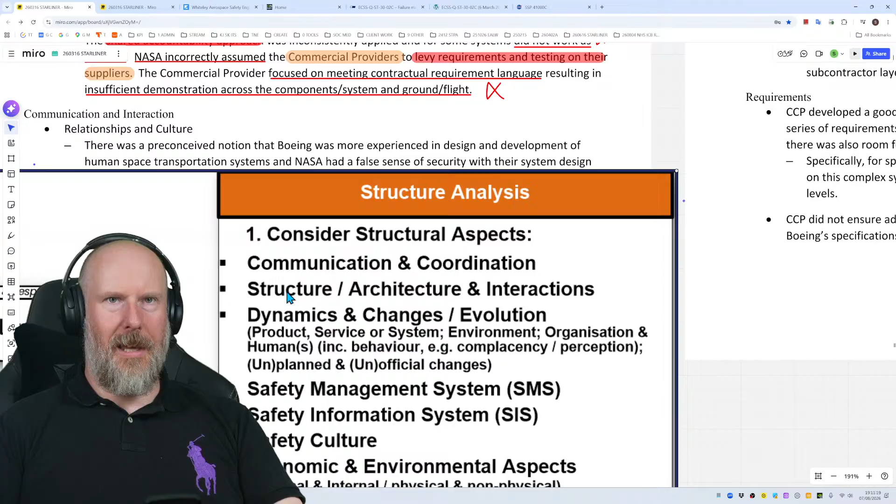So this section here, communication and interaction. I'm emphasizing this bit in CAST analysis because if you don't know anything about CAST accident analysis, essentially it's an approach to analyzing accidents based on STAMP. STAMP is the accident causality model and a series of principles about how accidents occur and why, for example failures are only part of the picture. We also need to think about dangerous successes, as in what went right that led to the accident, in addition to what went wrong, which is the traditional focus of investigations.

As part of CAST analysis, there are three elements: component analysis, physical analysis, where energy is transferred and actual harm occurs; then the controller analysis, which is this part, components of the control structure; and then the structure analysis itself. In the structure analysis there are about seven broad topics to think about, and this is not an exhaustive list but it's a good starting point. One of those topics, funnily enough, is communication and interaction - look, communication and coordination, structure, architecture, and interactions.

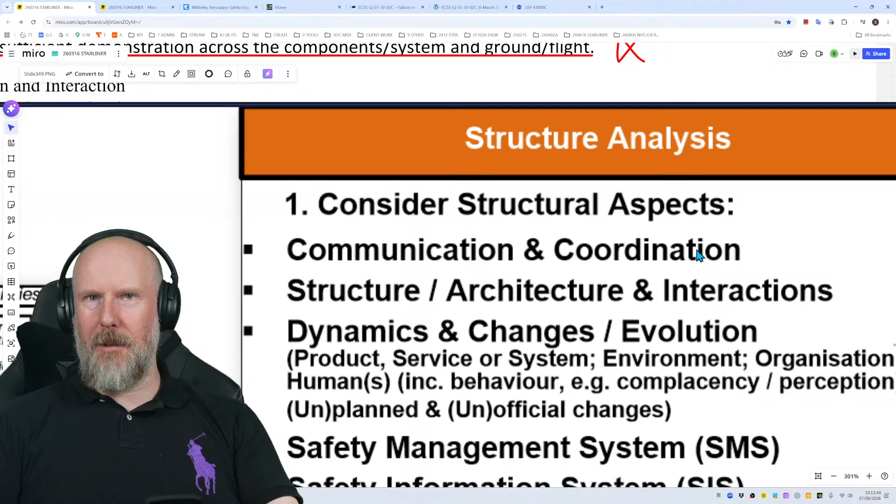We've already touched on dynamics and evolution and changes due to contract changes, so I won't bang on about that. I've already mentioned the safety information system in terms of the different stakeholders and suppliers sharing information or not. But let's just talk about communication, coordination, and structure, architecture, and interactions. Let's see what this next section says about those topics.

Right, so communication and interaction. The relationships and culture.

There was a perceived notion, so perception is a belief, and it might not match reality, it might just be a perception, a belief that's inadequate. There was a perception, preconceived notion. That's a perception, is it? It's been a long day, and it's Friday.

Happy Friday, everybody. A long few weeks, few months, few years.

There was a preconceived notion that Boeing was more experienced in design and development of human space transportation systems, and NASA had a false sense of security with their system design and component selection ability based on significant demonstration of successful experience and relationships spanning human spaceflight.

I don't know the history too well, to be fair, so I can't really comment on that. But it would be really nice if there were some references here to what that might be. Why would it? What's the evidence that those beliefs were reasonable and expected?

Is it that they've... I don't know, I don't think they were involved in the space shuttle. I thought that was Rockwell, but I don't know. I can't remember.

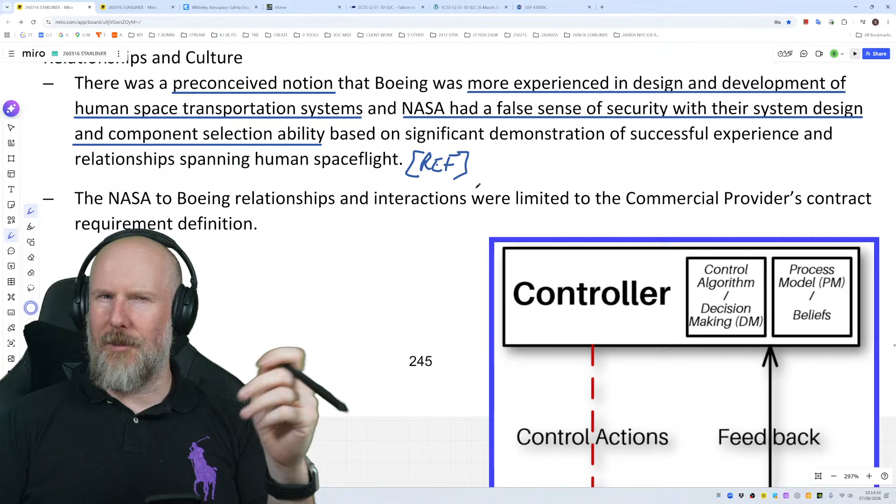In fact, actually, they do other stuff, don't they? Like the X-37B, but that's unmanned as far as I'm aware, uncrewed as far as I'm aware, unless something sneaky is going on. But yeah, so based on significant demonstration and successful experience and relationships, well, it does say spanning human spaceflight. So if I'm assuming X-37B is unmanned, then it's not related to that.

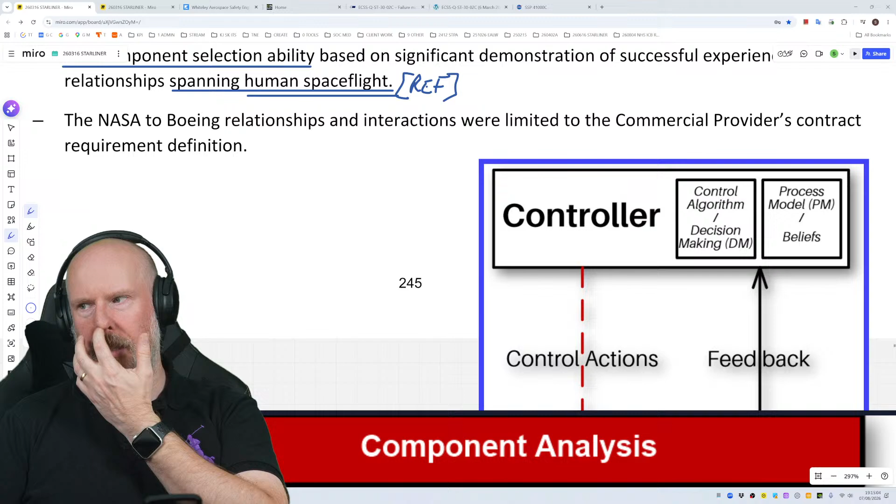Anyway, the NASA to Boeing relationships and interactions were limited to the commercial provider's contract requirement definition. So this contract requirement definition then, is this a reference document or what is it?

I don't know. Pardon me, is that a document that describes constraints, definitions, or what is it? I don't really know what that is. Boeing relationships and interactions were limited to the contract requirement definition.

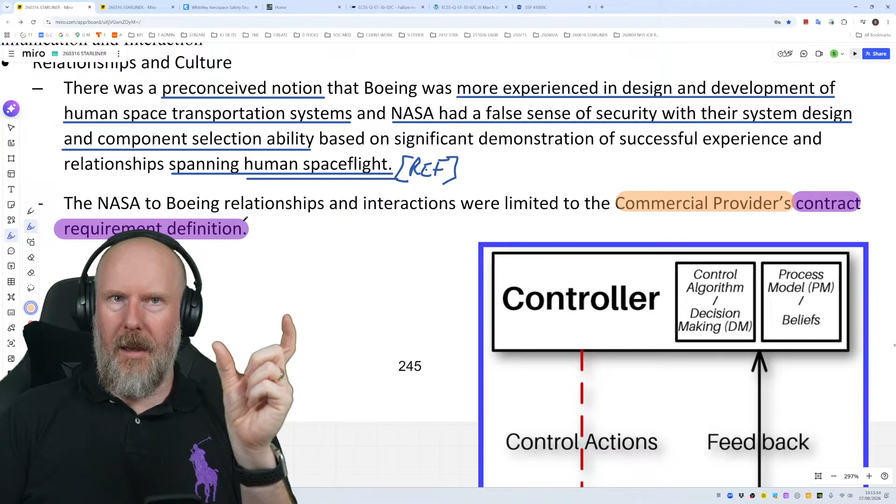So does that mean that when we're talking about, sorry, let's just zoom down here. When we're talking about structure, architecture, and interactions, are we saying that the commercial provider's contract requirement definition was for all intents and purposes a type of controller in that it constrains the relationships and interactions between NASA and Boeing?

Because if that's what it's saying, whatever this document is and how it affects the control structure needs to be understood. So I'd suggest an action there, a recommendation to review that contract

through the lens of a control structure and understand what it actually does, because that could be fundamentally undermining safety and mission success, contract success. I'd certainly want to look at that. I would absolutely recommend that.

There we go. NASA felt the need to prove it's unsafe or prove that it will fail. I mean, that's the complete opposite of what we should be doing with safety. NASA shouldn't need to prove it's unsafe or prove that it will fail.

The contractor, the supplier, it is their responsibility to demonstrate why their thing, whatever it is, is safe or presents an acceptable risk. And then NASA can agree or disagree. They shouldn't have to prove anything. You know, that's completely the arse about face.

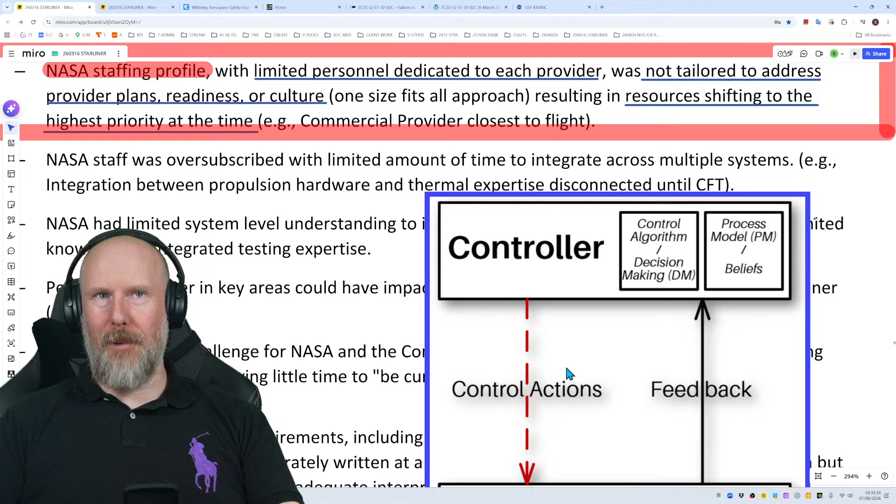I don't know. Does it come from outside the program? Is it somebody somewhere outside the program that's making all these constraints on the way the team behaves and performs? And if so, do they get any feedback? What feedback have they got? Has there been any feedback? Do they even know they've caused these problems, contributed to these problems? This is one of my bugbears. I'd argue that human resources is one of the biggest dangers to a complex program, after leadership and program management, project management. I say that facetiously, but also from painful experience.

And I'm moaning. It's Friday night. I'm moaning.

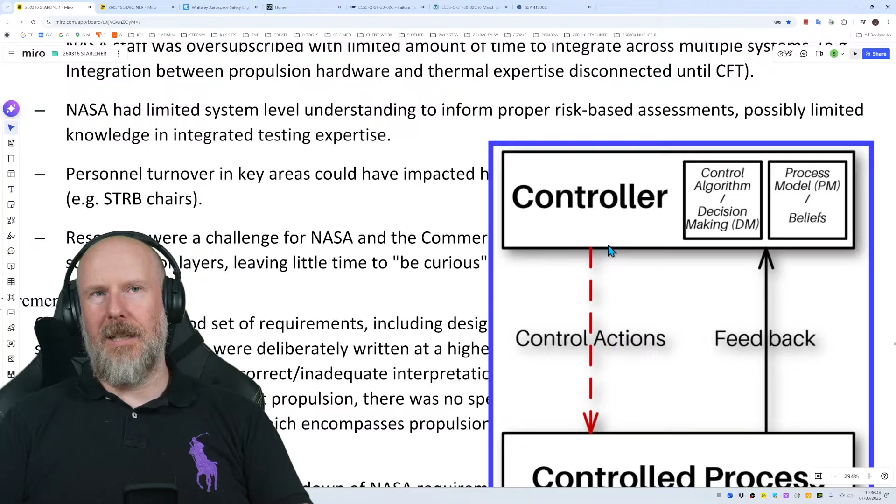Recruitment. How do you recruit safety engineers? Let's put a job ad out there. Come and do some safety work with us. But we're not going to tell you the salary, we're not going to tell you the benefits. So you just have to come for the love of the job. Well, when people get smart and realise how difficult and painful it is working in a complex program like this, they're just not going to come for mediocre salaries and dealing with nonsense. And I think the COVID, the cough that can't be named, when people started working from home, that really started to wake people up to how bad the deal was that they had. You're basically forced to commute, turn up to work. You're not necessarily compensated given the level of stress and hassle you have to deal with. And then, of course, you've got time spent commuting that you're never ever going to get back. So what's the deal? It's not a very good deal, is it?

Anyway, let's keep going. Right, NASA staff was oversubscribed with limited amount of time to integrate across multiple platforms, systems, e.g., integration between propulsion hardware and thermal expertise disconnected until crew flight test.

So again, this is how the staff were managed, structured, and their work was broken down and structured. Who was in charge of that? Who was the controller for that?

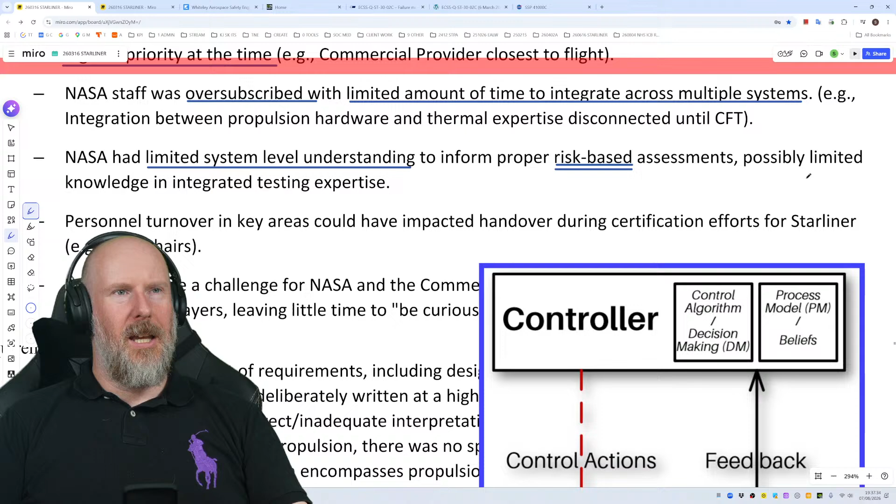NASA had limited system level understanding to inform proper risk-based assessments. I've already moaned about the concept of risk-based assessments on yesterday's live stream, so I'm not going to moan about that too much today. Possibly limited knowledge in integrated testing expertise.

Personnel turnover. There's the first mention of it. I'm going to make it pink. There we go. Personnel turnover in key areas. I was wondering when that was going to raise its head. And now it has. Could have impacted handover during certification efforts. No, mate. It most definitely did. I can absolutely be certain of that.

And it says STRB chairs just there, look. And if I remember correctly, that's the Safety Technical Review Board. Is that right? Let's just have a look at the organisation chart. Where is it? There we go. STRB, yes, the Commercial Crew Safety Technical Review Board. Right, okay, so if you've got the, hang on, Safety Technical Review Board, there we go.

So if you've got musical chairs, so to speak, you're changing the control structure. So if we go back to our little structural analysis section, dynamics and changes, evolution in the structure, organization changes. That is a change to the control structure. So it will have an impact. You might not be able to measure that impact, but it will have an impact.

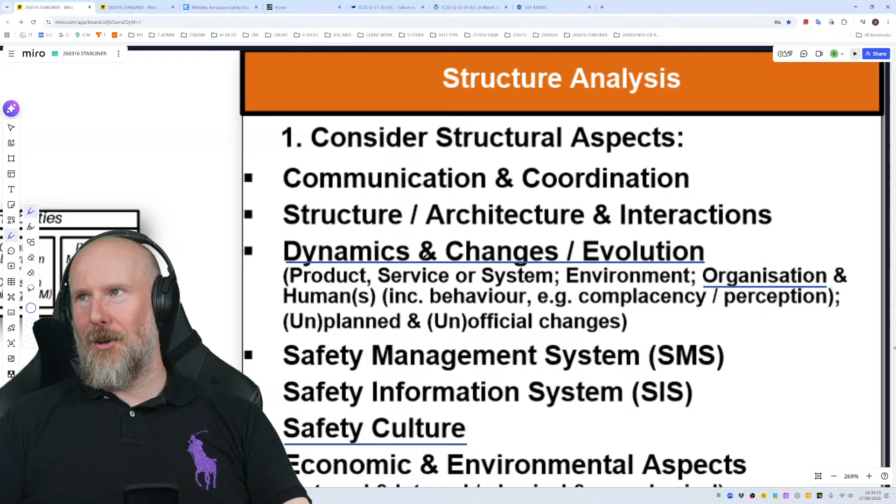And especially with the quality of handovers. And in my experience, handovers are nearly always not very good, if any at all. I mean, there was one program I turned up on. I was basically told, oh, yeah, this is a fantastic program, you really like this one, it'd be fantastic. And when I rocked up, I was like the seventh or eighth safety engineer in the space of 2 years, or maybe 3 years, something ridiculous like that.

And there was no handover, literally no handover. And so to learn and understand what was going on, I had to read and speak to loads and loads of people. And of course, when you read information that's not maintained, it's not updated, or it's in what I call a digital landfill site, Microsoft SharePoint, the digital landfill of everybody's hate, you don't know what's what, you don't know where things are.

You've got no introduction. You have to basically do an archaeological exercise to understand what information exists and then whether it's relevant or not. All while the clock is ticking and things are moving on, and people are like, come on, you've been here 5 minutes, come on, you need to get some work done. It's like, well, I don't know where I am. I need to observe, orientate, decide, and act. I need to go through a couple of OODA loops. Cheers, boys.

So yeah, if this stuff is going on, it's not could have had an impact. It will have done. You just haven't been able to detect it or measure it.

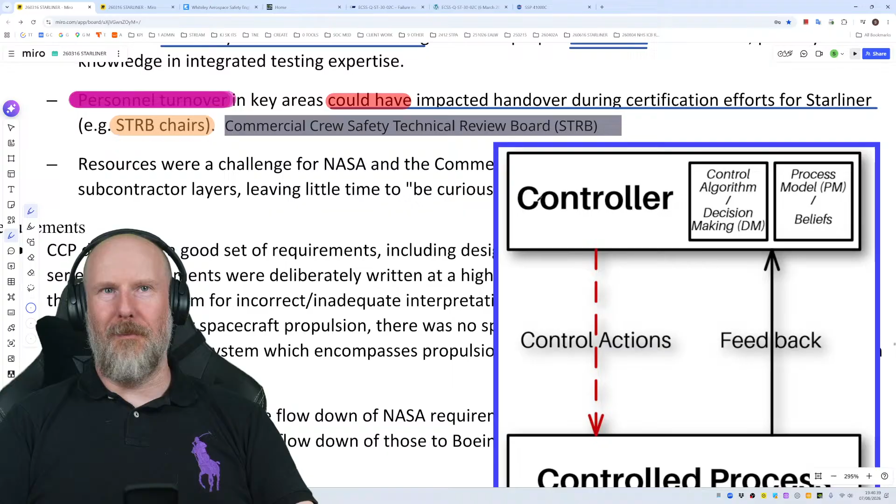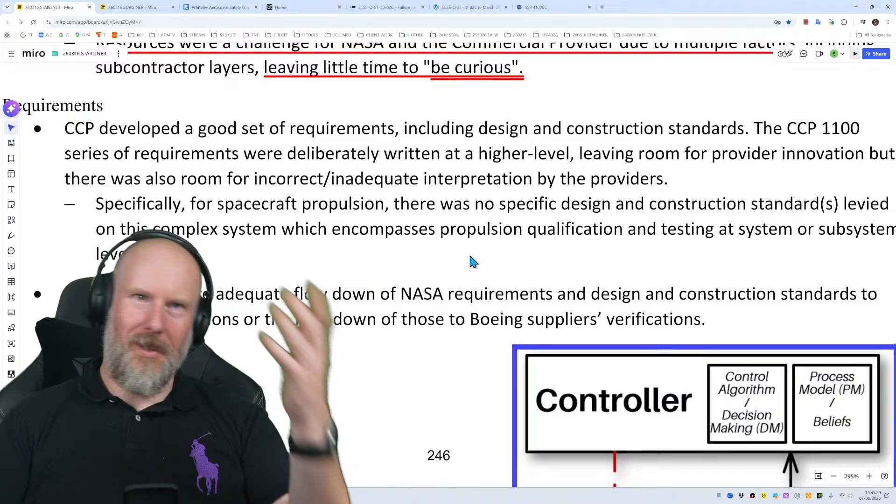Okay, right. Resources were a challenge for the NASA and commercial provider due to multiple factors, including subcontractor layers, leaving little time to be curious. Yeah, so you're going to burn out all your subcontractors. You're going to annoy them all, and they're just not going to want to stick around, especially if they're not getting the support they need. So it's not surprising. It's like I said earlier on. Go and talk to your safety engineers. Ask them, especially the contractors. They will tell you. Well, some will, some won't, because they don't want to get the contract terminated for being too open and honest. But that's the kind of nonsense we have to deal with.

Anyway, right, requirements then. CCP developed a good set of requirements. Who said it was a good set of requirements? Where's that evidence come from? I'm skeptical about that, but that's just me. I'm old, I've been around a bit. Anyway, including design and construction standards, the CCP 1100 series of requirements.

I wonder how many requirements they had in their database, and I wonder if they use DOORS or some of the Atlassian software tools that everyone hates.

Were deliberately written at a higher level, leaving room for provider innovation, but there was also room for incorrect, inadequate interpretation by providers. Yes, well, of course there was.

That's why it's so important there are regular feedback loops to make sure that interpretation is on point, and that it can be dealt with earlier than later. So again, not surprised. Specifically for spacecraft propulsion, there was no specific design and construction standards levied on this complex system, which encompasses propulsion, qualification, and testing at system or subsystem levels.

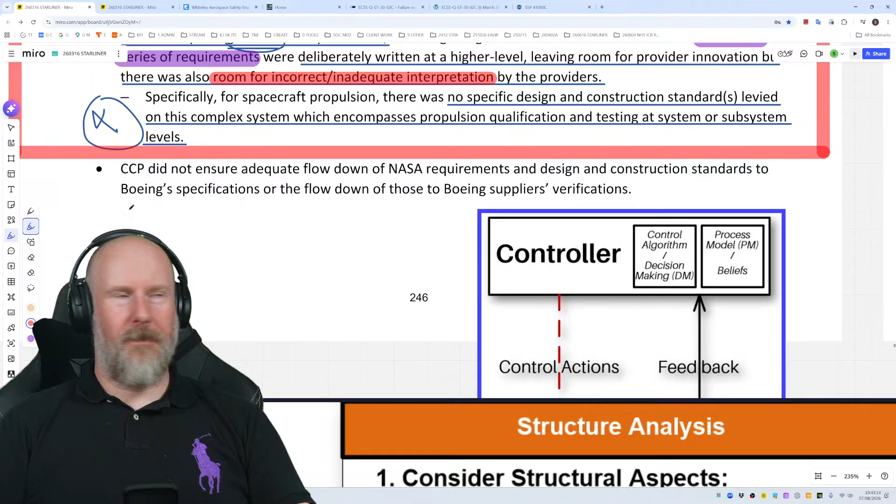CCP did not ensure adequate flow down of NASA requirements and design and construction standards to Boeing specifications, or the flow down of those to Boeing suppliers' verifications.

So you've got the CCP level not adequately flowing down requirements and design construction standards, then you've got the equivalent of Boeing doing the same to their suppliers, and then you've got suppliers trying to do their best, and when they can't, they just comply with the contract.

And so all these gaps and all of this technical debt is essentially hidden until somebody brave enough to stick their head above the parapet says, hey, something's not right here, these requirements are not good, we haven't got the requirements, or the requirements are late.

What can I say? Another red flag in the program management. If the requirements are late, or if the supplier hasn't received requirements from a higher level controller in the structure, that should be absolutely raging on the dashboard of program management, and actions must be taken to address that.

And if it's just left to be kicked down the road, you're just storing up technical debt and safety debt all the way to oblivion. And again, people know this stuff, this is not a surprise, this happens on all complex programs. It's just how we deal with it and manage it that's different.

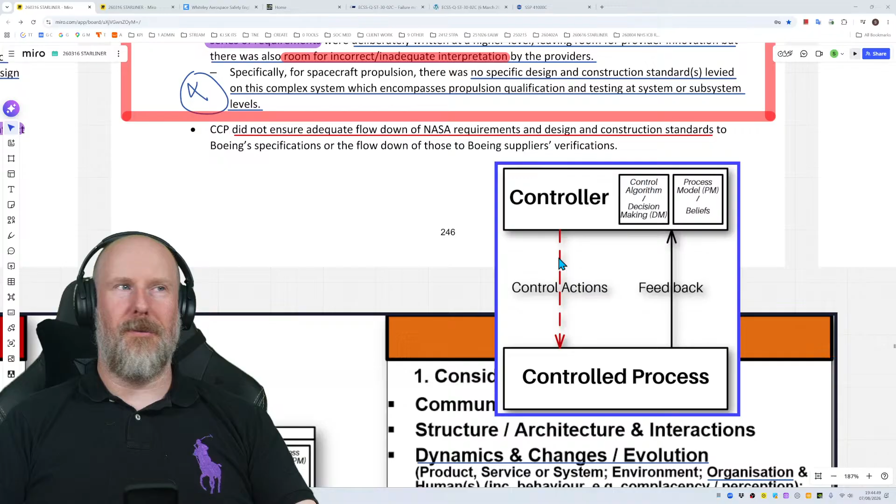So there's another serious recommendation there that must be sorted out. And again, it will be the same recommendation for other programs. Go and audit your other programs — if they're also suffering with this nonsense, they're also at higher risk of having a serious accident.

Okay, right. Component and subsystem specifications were developed.

Hang on a second. Yeah, no, hang on. NASA requirements and design and construction standards to Boeing specifications. Right, okay. Right.

So component and subsystem specifications were developed before mission designs were complete. For example, the AR specification — don't know what that is. Is that architectural specification? I don't know.

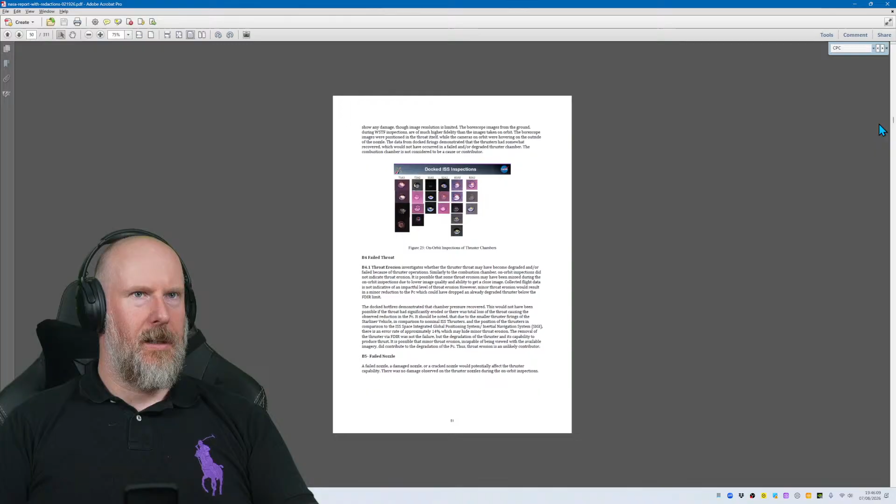Let's have a look, let's go to the acronyms list, which is about there. There it is, look at that — that was a good guess, wasn't it? Right, AA — no, it's not in there.

The AR specification includes mission timeline and representative duty cycles, but doesn't have the real mission duty cycle. Okay.

I mean, that is a serious contributor as well. Whoever is developing those specifications, the control action is to develop the specifications, document them, and pass them on to where they need to go. But there's a timing context related to that control action.

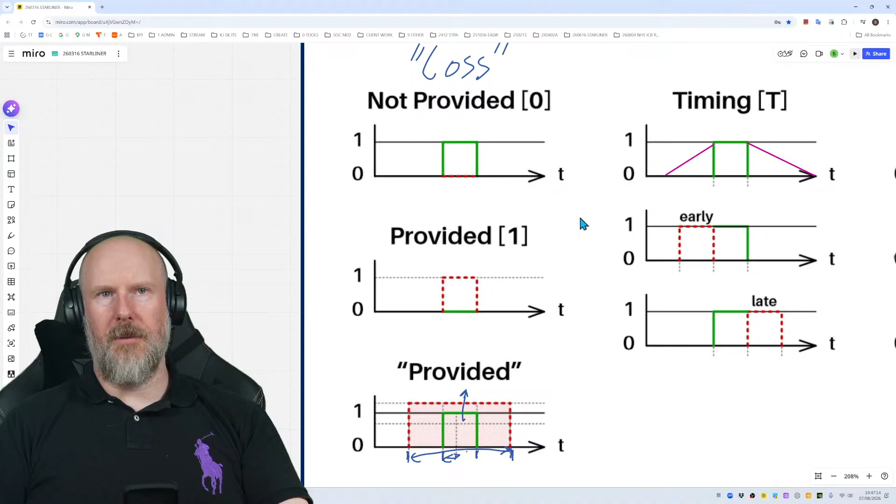So let's just zoom out for a second. Well, there we go, that's what I'm looking for. Right, so if we're talking about types of contributory control actions — if we're talking about developing the component and subsystem specifications, so who is the controller? First off, who is the controller that does that?

And then the control action they provide — it's not that they didn't provide it, because they did provide some specifications. So it's they provided it, but what is the timing, duration, sequence element to it? If they provide it too early, as in developed before mission designs were complete, then we know these specifications are going to be questionable — they may be completely wrong, they may be incorrect.

If that is going on in your program, you've got a potential problem. I've seen this a number of times, but it's often the program project managers who say, 'we're sticking to the program, that's it.' If you stick to the program that way with critical safety dependencies, you're going to end up having to do serious rework, or you're going to have an accident. Which is it? Their view is, well, we've got a schedule to follow. If we deliver on time before some other dependency, that's not our problem. The client will have to pay for an update to these specifications because their mission designs weren't complete.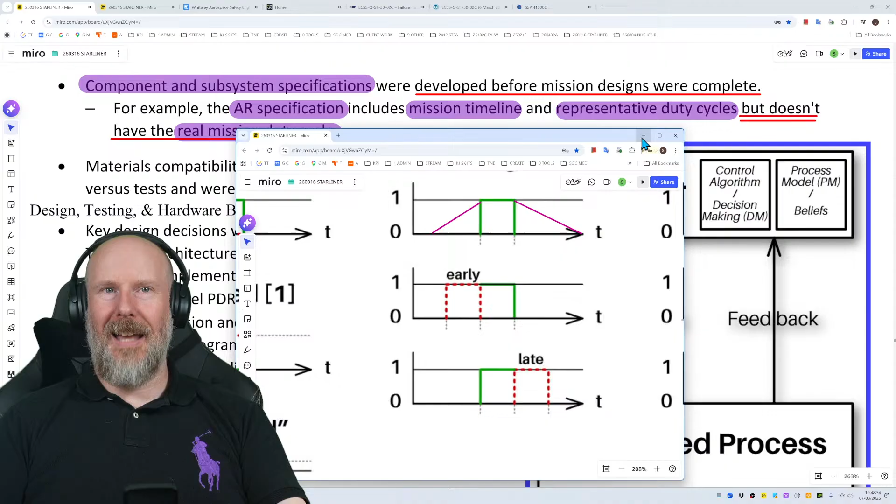So the question is, who is the controller coordinating that stuff? It needs to be coordinated. It's a critical safety program dependency with very real potential consequences. The specification includes the mission timeline and representative duty cycles, but not the real mission duty cycle. Who provides that specification? Are they making sure everybody knows they haven't got the real mission duty cycle yet? That should be coordinated and broadcast across the entire engineering community, along with its status.

I'm talking about stuff I'm probably preaching to the choir on, but again, these are not surprising. This is program management, program safety management. So why was it not working very well? Why was it not coordinated? That's what the investigation should go and figure out and fix, because if that nonsense isn't fixed, it rots your program from the inside.

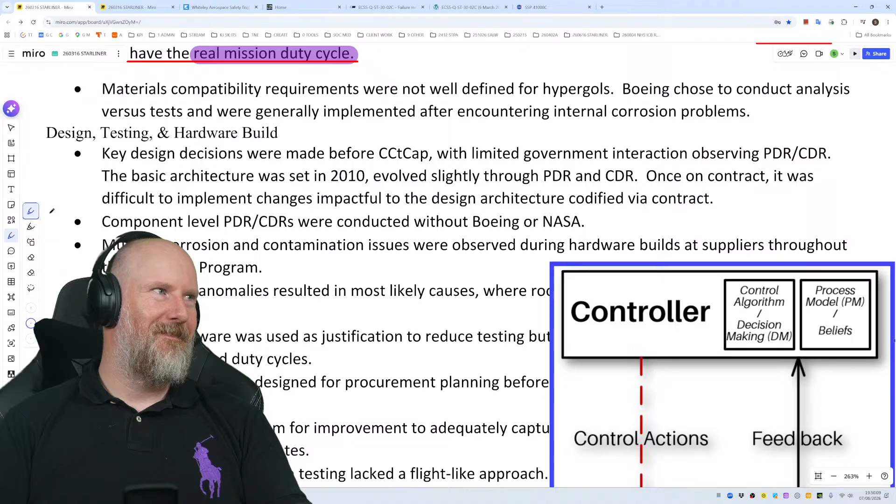Materials compatibility requirements were not well defined for hypergols. Again, why? Why were they not? Boeing chose to conduct analysis versus tests, and those were generally implemented after encountering issues.

Who or what is the controller doing that? Why did it make sense for them to do that? I can't accept that this is just poor engineering, the basics not done. Something else is going on here. Why is this going on? What I don't want to accept is that it's easy to just blame the humans, easy to say oh well, they're just incompetent, they didn't do the job properly, they didn't care. I don't think it's any of that. I think this happened because of some serious underlying reasons, and we need to figure out what that is and put it right.

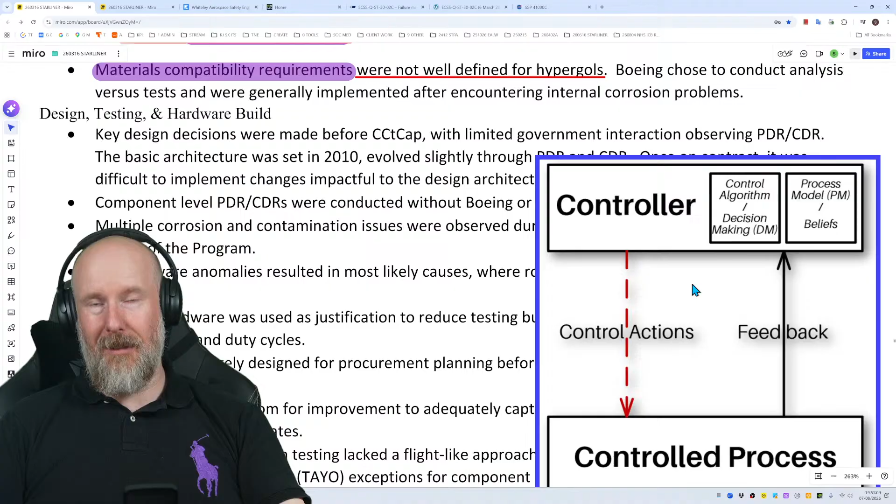Okay, where else are we? Let's have a look at design, testing, and hardware build. Key design decisions were made before CCtCap. If they were provided too early, with a particular context, is that a contributing control action? Key design decisions were made before CCtCap. Sounds like it to me.

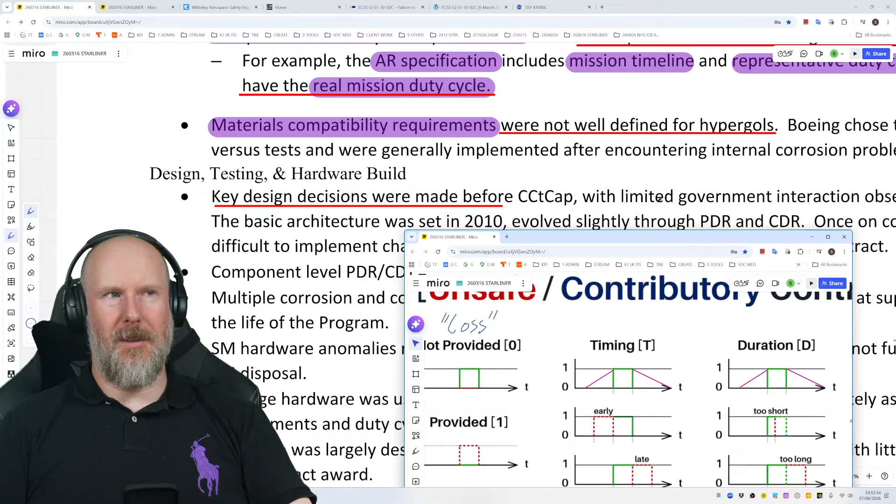With limited government interaction, observing PDR and CDR — okay, so they weren't involved early enough. Why was that? Was it because they just weren't invited to the meetings? And if they were, why was that? Why did that make sense? Were they specifically excluded from the meetings for whatever reason? Let's look at that. Let's figure that out.

So the basic architecture was set in 2010 and evolved slightly through PDR and CDR. Once on contract, it was difficult to implement changes impactful to the design architecture codified via the contract. There we go — this is why STPA will benefit your programs, because you can use it so much earlier in the life cycle than fault trees and event trees and everything else.

Component-level PDRs and CDRs were conducted without Boeing or NASA. What? Ah, dearie me.

Why? Why did it make sense to do that? Is it because of the contract? Is it because of resource limitations? That suggests that all of the PDRs and CDRs, or maybe the final CDR, whatever it is, needs to be reviewed top to bottom, as though doing a fresh CDR. That's what that sounds like. That's a recommendation.

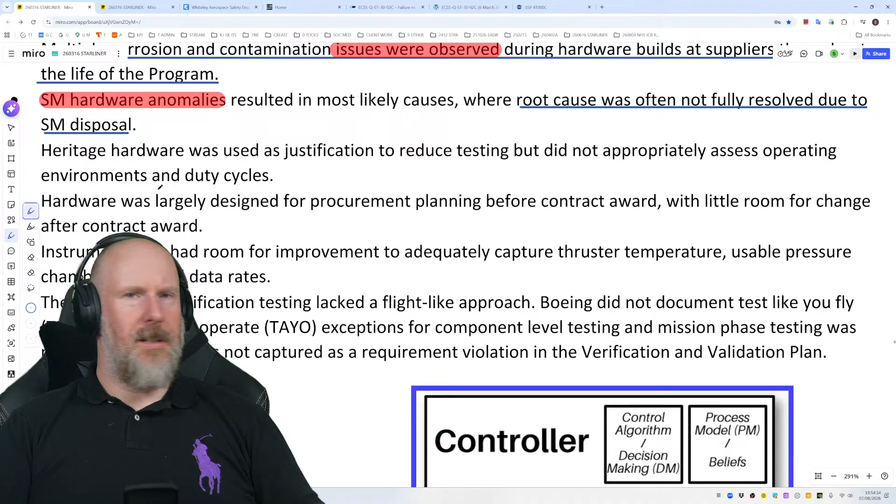Heritage hardware was largely designed for procurement planning. Heritage hardware was used as justification to reduce testing, but did not appropriately assess operating environments and duty cycles.

So who is assessing these things? What part of the organization? Is it the supplier? Is it Boeing? Is it NASA? Is it a combination of all three? And why didn't they do that? It's basic engineering for this stuff. So why was that not done? What is it about the control structure about this? Why does it make sense that it was not done?

Hardware was largely designed for procurement planning before contract award, with little room for change after contract award.

Yeah, I mean, I've seen this, and it is really frustrating because the way the contracts are let, I don't know about this particular situation, but in a lot of my past experience, painful experience, often people in supply chain rush to deliver contracts to suppliers. Suppliers will copy and paste what they've always done and say, well, here it is, and it's more expensive because it's new. They don't actually address the problems they've always had, or they inherit the design from some other supplier, or they buy it out, whatever. They assume that it's already okay.

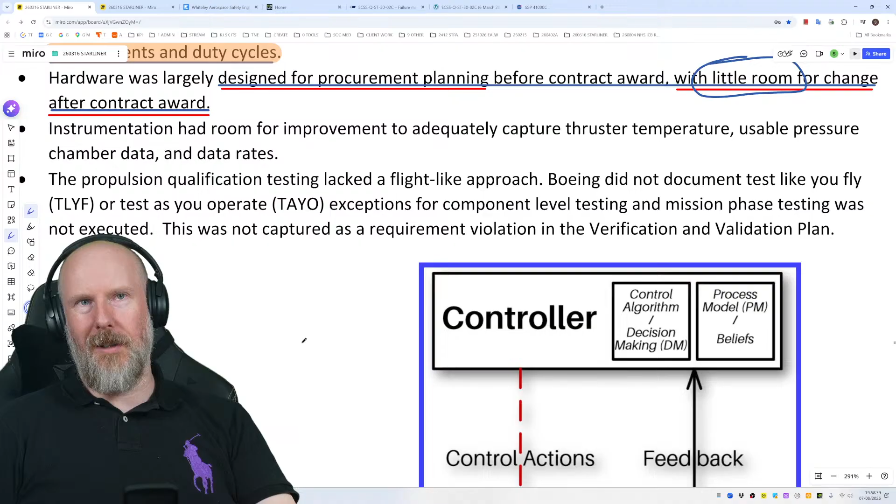But these are the kind of systematic program issues that need to be addressed. And until we start dealing with these problems properly, we're going to have repeated issues such as this that are very expensive and costly to fix.

And it reminds me of that saying - for want of a nail, the kingdom was lost. Where does that come from? For want of a nail, the kingdom was lost. It's an old poem, an old proverb.

For want of a nail, the kingdom was lost. And what that means is the horseshoe on a knight's horse was lost because it didn't have a nail fitted properly, or the nail was missing. And because that knight's horse was not as effective as it perhaps should be, the knight wasn't as effective. And because the knight wasn't effective, the ripple effects across the battlefield led to the battle being lost, which led to the war being lost, which led to the kingdom being lost.

And I really like that proverb because it highlights this: the people involved in horseshoes, the farriers, putting nails in and making sure it's maintained properly - because that control loop was not adequate, it had ripple effects across the entire control structure. This is what we're talking about here.

Instrumentation had room for improvement to adequately capture thruster temperature, usable pressure, chamber data, and data rates. Okay, so why was it not improved? Why was it not made better? What was the decision making? I would have thought on a flight test, with crew, you'd be trying to get all the data you possibly could and then some.

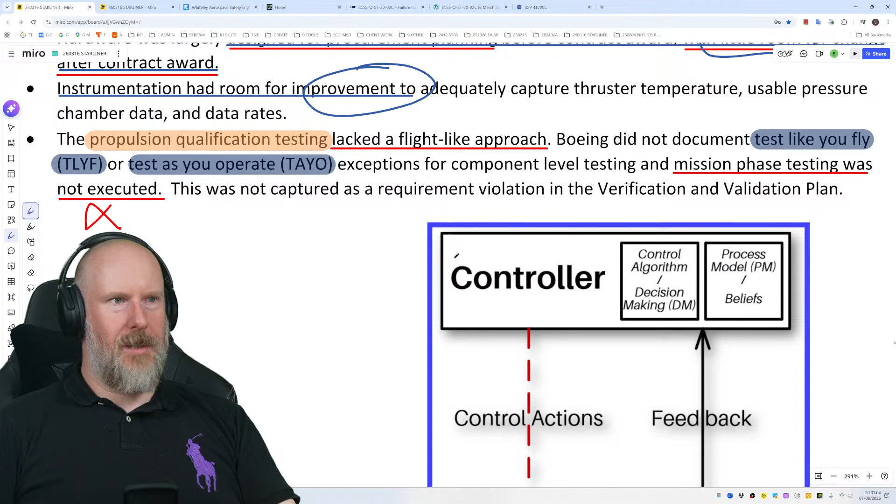And the propulsion qualification testing lacked a flight-like approach. Okay, well, what does that mean? Why is that? Boeing did not document test like you fly. Test like you fly, or test as you operate exceptions for component level testing and mission testing phase testing was not executed. Again, why was that? Why did Boeing or the supplier not do that testing? Why would it make sense?

This was not captured as a requirement violation in the verification and validation plan. Again, why was that? This is all about engineering integrity, engineering process integrity, and the management of it. It doesn't sound like there was any kind of control over that, or if there was, it was not effective. So why was that? Let's have a look at it. Let's make sense of it.

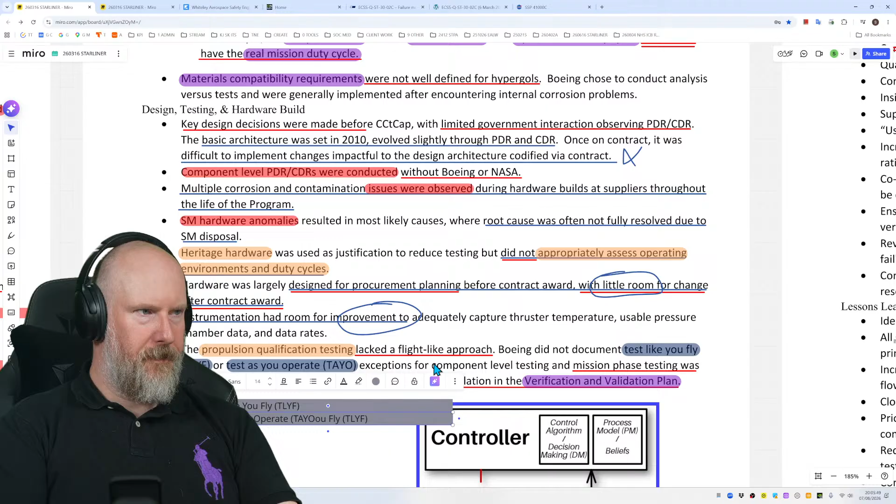I was working with a client a few years ago, a world-renowned, world-class client doing some fantastic work. When we were doing it, I provided them some STAMP foundation training, and then we did a workshop together live in person. We had members from the design development team, the test team, the safety team, the certification team, the cybersecurity team, and we also had somebody representing the testers, and they're a different breed.

They're fantastic because, like I said earlier on about the red team, blue team scenario, the red team is there to try and break your stuff. And that's what testers are there to do. So they think outside the box and use their experience from past testing to really help the designers anticipate problems and fix them before they get found in test. So they save a lot of money.

So one of the things I recommend is make sure you have testers involved in your safety work. Make sure they are an SME, a core SME, like human factors people. Make sure you've got human factors engineers, human factors psychologists, testers, test engineers, flight test engineers in this case as well, along with your other team members, because they absolutely enrich the work so much, and they can come out with some really fantastic stuff that you might be like, well, what? I don't believe that. And they're like, yeah, we tested it, we did that, we broke it, this is what we need to do to fix it. So yeah, get them involved, get testers involved.

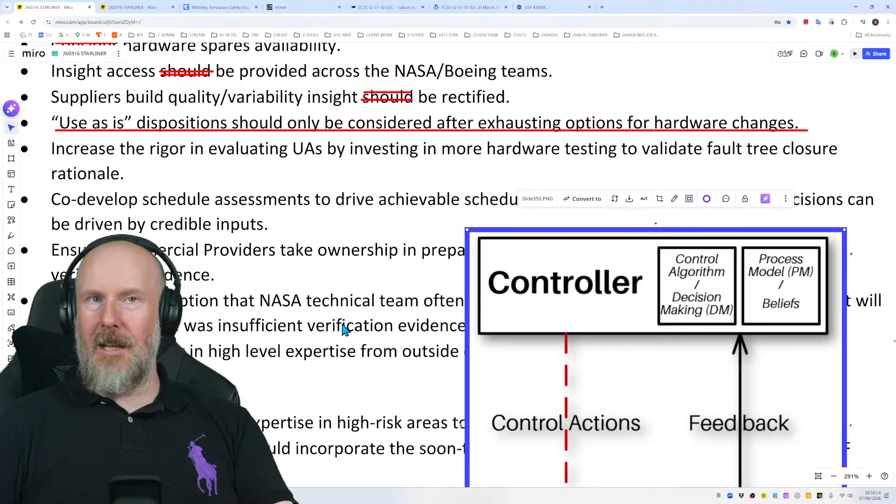Because reuse for different contexts — if you use an STPA, you can find what those new dangerous subtle contexts are before you walk into a minefield. But if you're not doing that, you've got to do it. You're gonna come unstuck if you do this kind of stuff.

Increase the rigor in evaluating UAs — unacceptable anomalies, is it? Increase the rigor. Yes, I agree with that. I would say...

I think the chat, I think you know what I'm going to say, don't you? Where's my pen gone? There it is.

Use STAMP, STPA and CAST. I'll probably focus on STAMP and STPA, to be honest, but that is what I'd recommend. That is what you should do. To increase the rigor, make it better, do that. And I'm hoping from all of these live streams, all 29 plus, we're going to have a 30th, maybe more, next week.

Use STAMP STPA. I'm hoping you'll see from the live streams that it will provide benefit. And if you need help to do that, please get in touch. Don't struggle, because you can spend time trying to figure it out yourself, reading all the books and papers and other good stuff. But you need to do this fast. You don't want to be faffing around wasting years, because every week or month you waste trying to figure it out without help is opportunity lost. And when you're working on a program of this scale, that disproportionate impact could be in the millions, if not billions, very quickly.

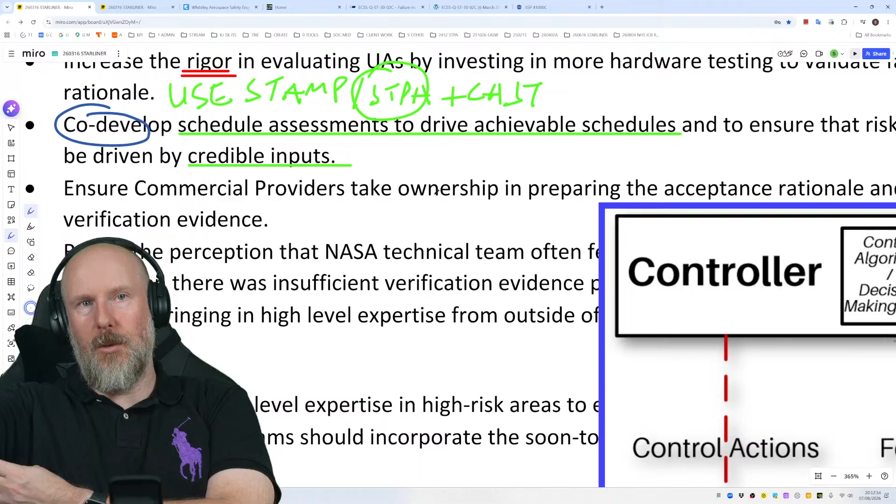Co-develop schedule assessments to drive achievable schedules and to ensure that risk-based decisions can be driven by credible inputs. Yeah, that's a good one. I like that, but it doesn't fundamentally address the controller that does the scheduling and makes schedule decisions and how they collect information and deal with the feedback. This is not addressing the controller; it's addressing what they should be doing. We need to go further than that. There's a big thing we need to dig into there with how the schedule is done, how it's planned.

Ensure commercial providers take ownership in preparing the acceptance rationale and providing verification evidence. So when we say ensure, is it that they already have a role and responsibility to do that? And if so, why were they not doing it? Who's holding them to account? What is that accountability feedback loop like? And if they weren't doing that, does that mean the contracts were inadequate? And if so, the contracts need fixing. The contracts should also be checked for anything else that's missing from a roles and responsibilities perspective.

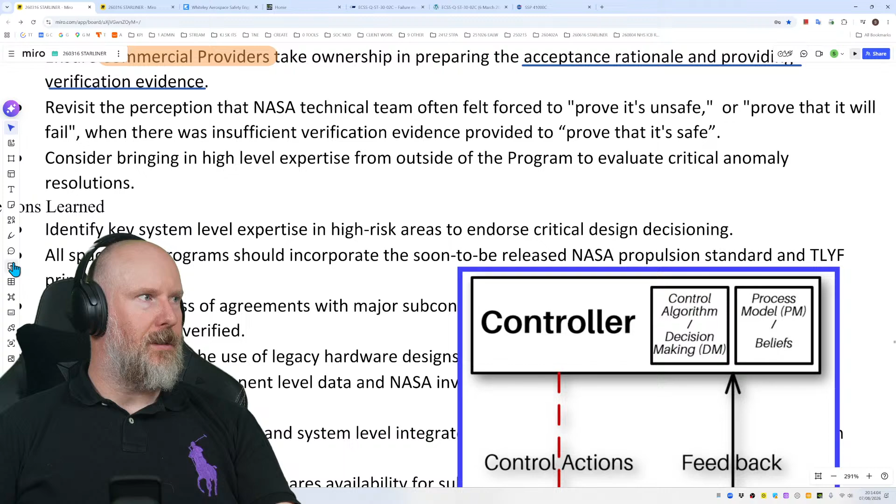So, revisit the perception that NASA's technical team often felt forced to prove it's unsafe, or prove that it will fail, when there was insufficient evidence provided to prove it was safe. When it says revisit the perception, is that an action to go and understand a bit more about it and find out? It sounds like it is. Absolutely agree, that needs to be sorted out, and it needs to be clear in everyone's roles and responsibilities what their role and responsibility is. It's not NASA proving it's unsafe; it is the supplier, the commercial provider, demonstrating that it is safe and that the verification and validation evidence they provide is representative and robust. NASA should just be looking at it going, yeah, it looks good to me. It shouldn't be digging into it and trying to prove it's unsafe. That's not what they should be doing.

Consider bringing in high-level expertise from outside the program to evaluate critical anomaly resolutions. That is interesting, that is interesting. I think that's a good idea, I would certainly help with that. I could absolutely go to town on that. I'm pretty sure my safety spidey sense could certainly find some interesting things for us to deal with, and also how to resolve it. But I think that's a good idea, a great idea, and I would suggest using STPA for that.

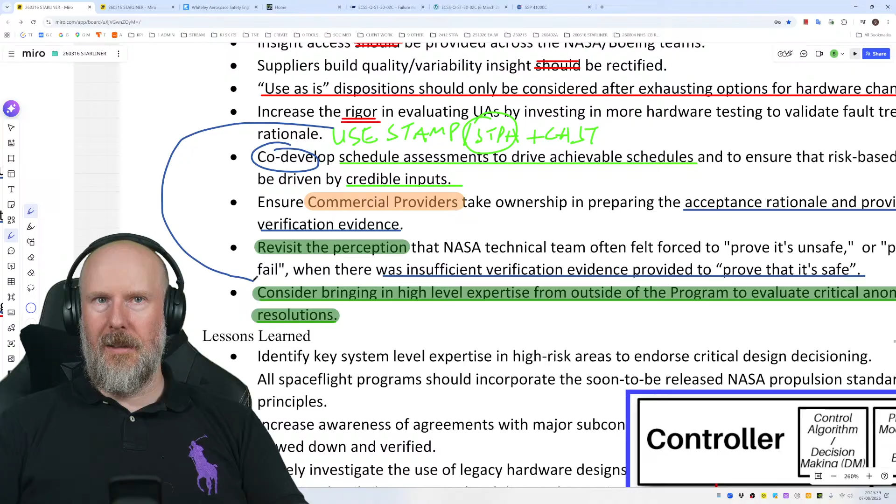Here we go, right, lessons learned. Identify key system level expertise in high risk areas to endorse critical design decisioning. Yeah, okay, I agree with that. Again, were those people present in the first place? If not, why not?

There's two things here. The first is having the right people, the right controllers involved in the structure at the right time. So it's about having the right people, the right stakeholders, the right controllers involved in the control structure, but then also making sure that they do their magical stuff at the right point in the program with the right dependencies. Because once the design has been decided, there's incredible pressure not to revisit it or change it. And that incredible pressure, wherever it comes from, needs to be diffused so that people have got the space to do what they need to do from an engineering perspective.

And if that means delays in the program, that means delays in the program. That's the nature of the beast, unfortunately. And I can appreciate there are knock-on second-order effects elsewhere that need to be managed, but it's not this team's responsibility to manage the risk elsewhere. They have to do what they need to do to be able to achieve their program, the safe design that they need.